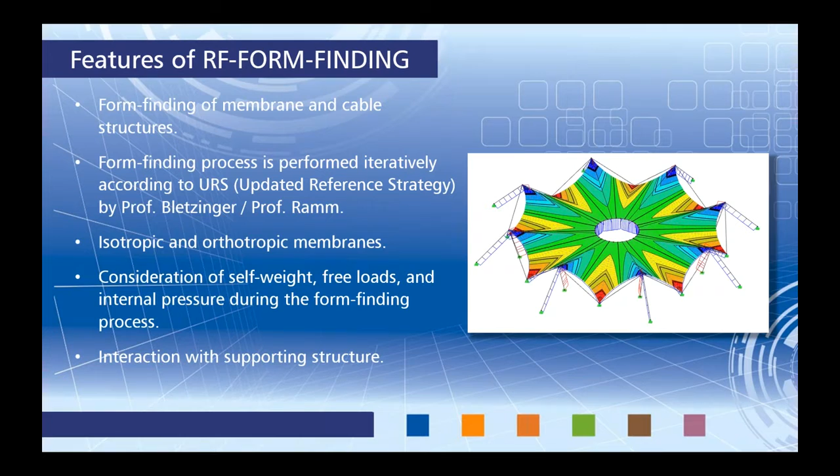Our other add-on module, RF Cutting Patterns, uses the minimum energy method for a very accurate cutting pattern. Essentially, we're turning this 3D membrane element into a 2D cutting pattern via the minimum energy method. We can also take into account uniform or linear compensation by warp or weft directions, meaning typically these membranes are going to be stretched when they're applied to our structure. So for the 2D cutting pattern, we can take that compensation into account, and we can apply these compensations for boundary lines around the 2D cutting pattern, so it doesn't necessarily need to be in the warp and weft directions.

We can also allow for different allowances, such as for welding and for boundary lines. Welding for overlapping members, maybe we need some additional material. Boundary lines for the upper and lower portions of the 2D cutting pattern as well. There is adaptable data organization, meaning even after we've performed the calculation for our 2D cutting pattern, we could go back and easily add in some additional material for welding and boundary lines without having to recalculate the 2D cutting pattern.

Lastly, I'll show you how to output the cutting patterns both graphically within the RFEM printout report, as well as tables. These tables can be exported directly to Microsoft Excel for further sorting. And lastly, we can export them as a DXF file, open them up in AutoCAD, and show you how to utilize the cutting patterns this way.

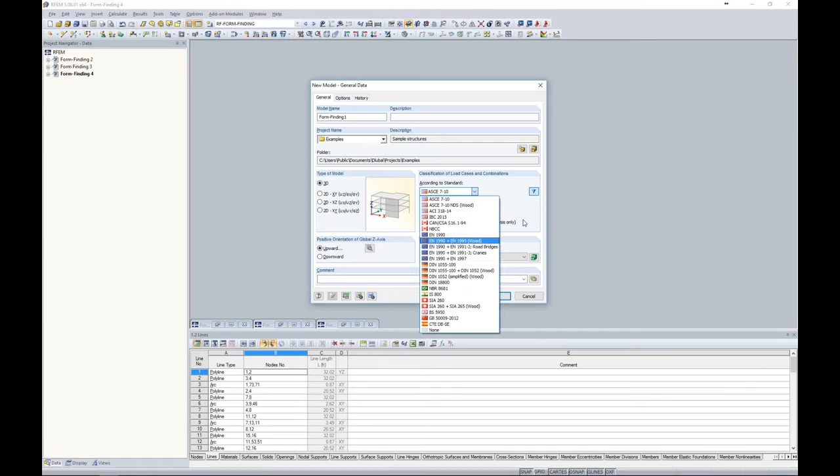When I have this checkbox checked, the program will automatically create those load combinations. You can see that when I uncheck this, I can manually put in those load combinations if I'd like to as well. It's important under the Options tab, when we're utilizing RF Form Finding and RF Cutting Patterns, to check on these checkboxes, otherwise we won't have those options within RFEM. So when checking out the form finding of our membrane structure, it's important to check these boxes, and then we can launch our model.

So up pops RFEM, and you can see here that we have our basic graphical display in the center. We have our tables to utilize down at the bottom. Over on the left is our project navigator, which controls some of the input data. We'll also see our results available here, and lastly we have all of our tools up at the top. Today we'll be using all of these options.

I want to begin with drawing a basic line element. So up in my toolbar, I can choose to draw a new line, and you'll notice that we have many different line types. You'll hear me say this often today, that we have a lot of AutoCAD-like capabilities within the program, so things like complex geometries, which is quite common for membrane type structures, is really no problem to model within RFEM.

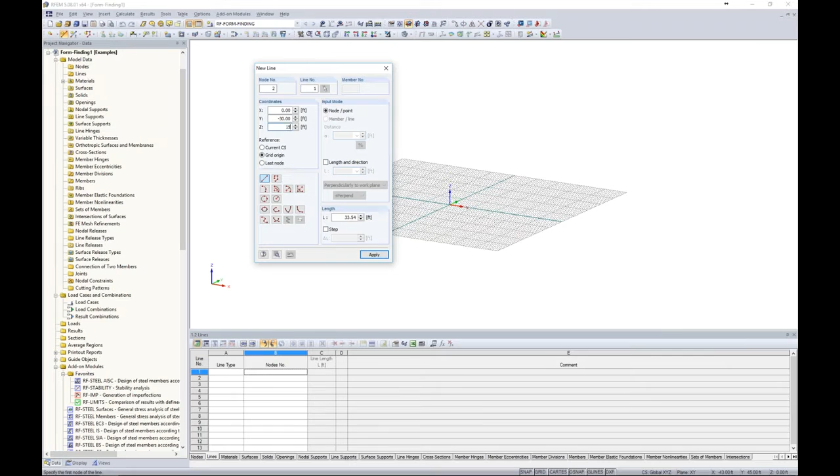To begin with, we are just going to do a typical straight line here, and I could draw this graphically in my viewport over on the right, but I can also just enter nodes directly. For example, 0, -5, 35, then click apply, and enter my second node at 0, -30, 15, and hit apply. So now you can see we have this line element in our 3D view. I'm going to select this entire line and the nodes and use my rotate copy tool.

Here I can specify that I would like 8 copies at 40 degrees, rotating everything about the origin 0, 0, 0. We also have a nice feature down at the bottom - if I click on expanded settings, I can create lines between my copy nodes, and even create surfaces between those lines. So now when I click OK through all of these dialog boxes, I have my conical structure with just a few clicks of a button.

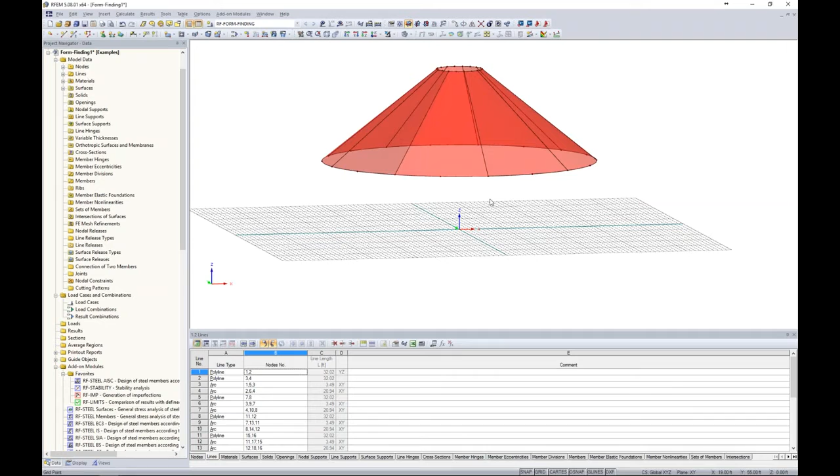Now turning this into a plan view, and maybe I turn off my grid down here at the bottom, I'd like to create cable elements spanning between my longitudinal lines here. Now a cable element certainly can't be constructed in the field as an arch type line like this, so we need to create straight lines here. Well, how do we quickly do this?

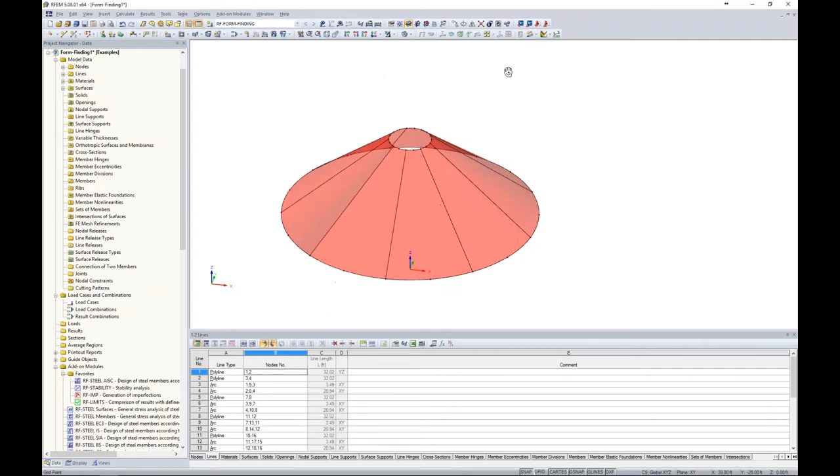I'm going to turn this into an elevation view, and highlight all of my members down at the bottom. You'll notice that my table 1.2 lines shows me exactly which lines I have selected in my graphical view. Using this feature within the table, I can show the selected objects only, so these are only my lines selected at the bottom of my structure. The line type right now is set at arc - I'm going to change this to polyline, then using the F8 key, I can quickly copy that same setting down for all of my line elements here.

Now, if I turn this back to my plan view, you'll notice these are now straight lines, but I still have this node in the middle that I'd like to get rid of. For this, I'll turn this into wireframe view, and now holding down my control key, all I need to do is graphically select all of my nodes here. Then I simply click the delete key, and I have these straight line elements.

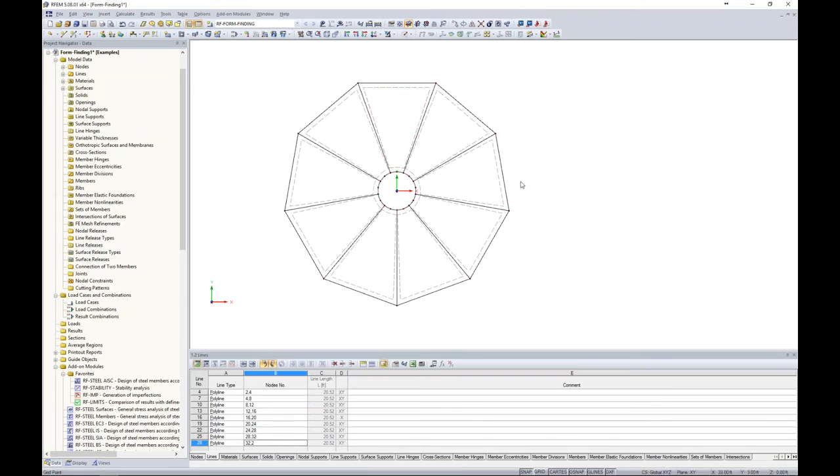So with these line elements, I'm again going to select them graphically down at the bottom, and right click to edit the line. Now every member within the program is created with a line element underneath it, so we have a nice tab here up at the top called member, and we can create a member availability. Now up pops our new member dialog box, and we can create a new cross section.

So here I launch my cross-section database, and you can see that we have many different cross-sections, such as our rolled sections, built up, thin-walled, massive for concrete sections, timber. For these elements, I'm going to utilize the solid sections here. We have our filters over on the left, which show some different producers applicable to the Eurocode design. We also have our AISC database.

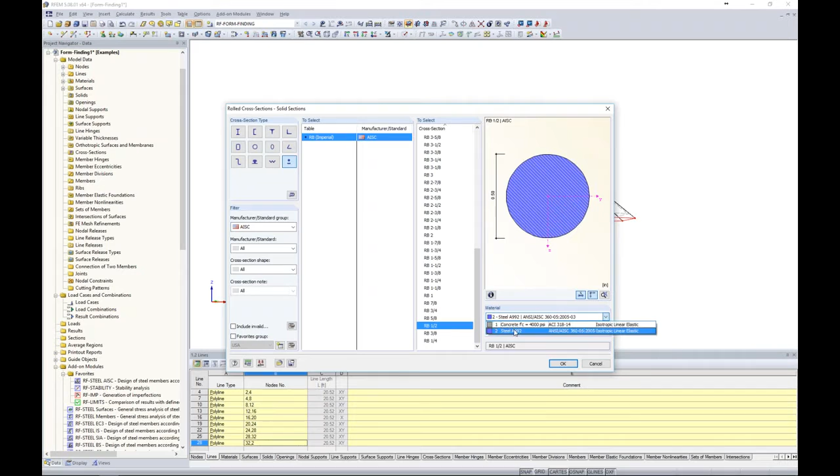Now I can scroll all the way down to the bottom to choose a 1/2-inch diameter cable element. My default materials within the program are 4,000 psi for concrete and A992 steel. I'd actually like to create a new material here.

My material database is brought up, and this looks similar to my cross-section database as well. I have my filters over here on the left, so under material category, I'm going to change this to stainless steel. Now I have the ASTM as well as Eurocode down here to select from. Looking at ASTM, I have a very long list of stainless steel materials. We can also utilize our favorites list, which I created called USA - these are common materials I use often for projects, and you'll notice I added stainless steel A479 here. I can select this material and click OK through all of these dialog boxes.

Now the member type right now is set at beam. I actually want to change this to a cable member - that's the element we're trying to model here. So now I can open up the member type. This is available because I've activated the RF form finding add-on module; otherwise you wouldn't see this option available.

Here we have the cable parameters for form finding, and with this we either have geometry or force. With geometry, we can set a target cable length, or a target cable absolute sag, relative sag. With force, we can set a force in the cable or a force density. These are the properties that we'd like to see after the form finding process is complete.

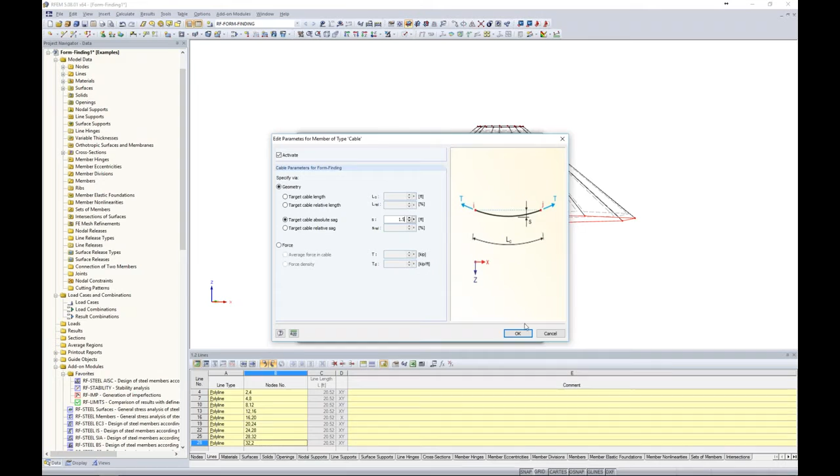When we're choosing geometry, this is maybe relevant for border cables and membrane structures, such as what we have today. The force option is maybe relevant for cable webs. For our example, we'll choose a target cable absolute sag of 1.5 feet, and I can click OK.

So now that I have set this form finding capability, I click OK, and now we have the cable element specified down here at the bottom. I want to turn this back into the rendered shape to show you guys that right now my surface elements are red - that means there's probably something missing within the program that is trying to flag me. If I highlight all of my surfaces, right click and go to edit, you'll notice that my stiffness is set to null - null means nothing. So we need to put in these material properties as well as our form finding process for our surface elements.

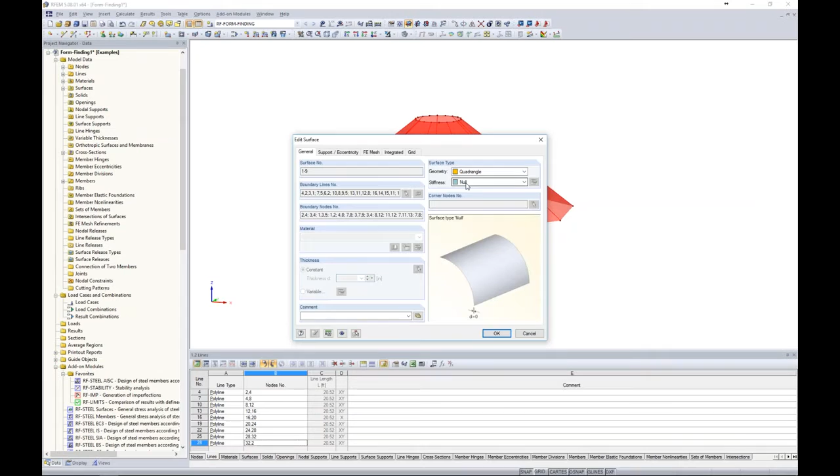So the first thing I'm going to do is use my drop down to select membrane orthotropic, and here is where I'm going to create a new material. Now, membrane materials are not so straightforward as something like steel A36 or A572, for example - this is something we maybe get from the manufacturer, or do our own testing on these material membranes. So when I go to create a new material, I need to first give it a description, and our material model by default is set to isotropic linear elastic.

I actually want to change this to orthotropic elastic 2D. Now up pops my dialog box for my stiffness properties. For this, I'm going to jump back to the PowerPoint to show you a quick screenshot of some calculations. For my membrane material, I got this from my colleague in Germany - this is the calculations after placing this material membrane into a biaxial testing machine. We apply different forces and get results based on stresses and strains with those different forces applied. We do our calculations in order to find out what these stiffness parameters are - that's a little history about where these particular membrane properties came from.

So back in RFEM, we can simply apply those stiffnesses here. For example, it was found that EX is 93 KSI, our EY is 84. Our shear modulus is going to be the same in all three directions at 0.15, and our Poisson's ratio is also important at 0.314. Now I click OK.

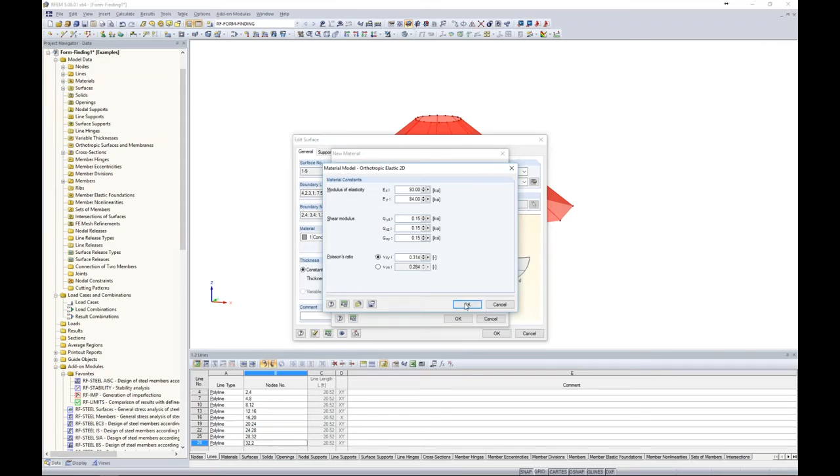So we have now defined the specific material that we'd like to use for these surface elements. Now, similar to the cables, we'd like to edit the parameters of the stiffness - again, these are options available especially in this form finding tab when we activate the form finding module. The type we'll use here is constant thickness, and under my next tab, constant thickness, I'm going to set the thickness at 0.04 inches. Then I can click on my stiffness matrix to see those values here.

Perhaps I'm interested in those. Under the form finding tab, this is the availability to define pre-stresses along the warp and weft directions with our form finding module. You'll notice we have two different calculation methods, both the standard and the projection, and this just comes from the general form finding method URS that I mentioned in the PowerPoint.

Standard is really used for membranes supported by points or arches or pneumatic structures. Pneumatic just means that they are air-supported structures supported by internal air pressure, which you can see down here is where we can define that internal pressure. Projection is used for conical shapes, so that's actually the type that we have today.

But just for example purposes, I want to show you what this form-finding deflected shape looks like by using the standard method to begin with, so you can see why we've chosen the wrong calculation method. So we want to define our forces, defined according to the warp and weft direction. This is the local X and Y axis.

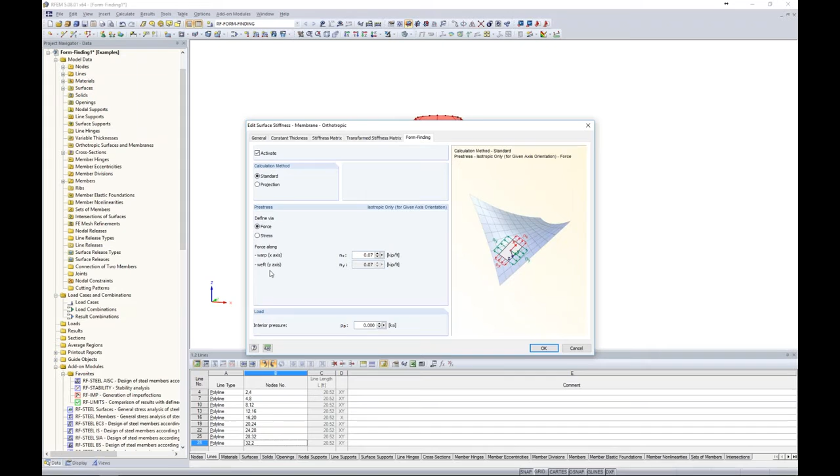Now, before I define these, it's very important that we go back to our model, and you'll notice my material is now blue because we specified these specific material properties, and I can right-click and turn on my local axes. If we're going to define these pre-stresses according to the local axes, you'll notice all of my local axes are going in different directions. This is not good if we're going to apply our pre-stresses globally to all of our surfaces. So how can we address this quickly without having to redraw all of our surfaces?

Well, if I highlight all my surfaces, I right-click to edit them again, we have a tab called Axes here. Axes allows us to quickly rotate our local axes, and for example this third option down here, we can point all of our local axes direct to a line. This line can be a fictitious line within the model. Here for example we'll choose the origin as the bottom point, which is going right up the center of the structure, and our second point will be at the origin but at a Z elevation of 35 feet.

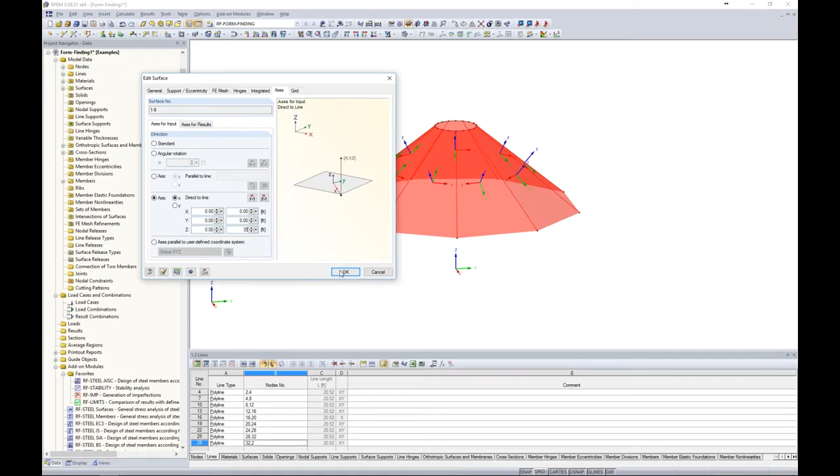So now when I click OK and I take a look at my local axes, all of those X local axes are pointing right towards the center of my structure. This is very important when we're defining our pre-stresses for our surfaces globally here.

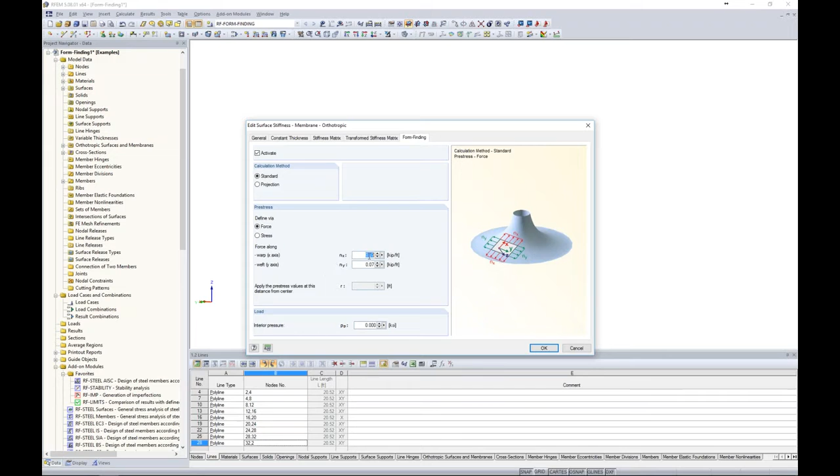So now going back to our General tab and our Stiffness Parameters, under the Form Finding, here is where we can specify our force in the warp or the x-axis, and weft is the y-axis. This is also known as the longitudinal transverse directions. So for NX, maybe we'll select 0.55 kips per foot, and we click OK.

So now that we've defined these pre-stresses, and I can turn back off my local axes, we'd like to run this form finding calculation. Before we can do so, we do need to support the structure somehow, otherwise we'll obviously get some type of instability. So just applying nodal supports at the bottom, I have my typical hinged support here. I can highlight over the bottom, I'll apply just a hinge line support at the top, nothing special here.

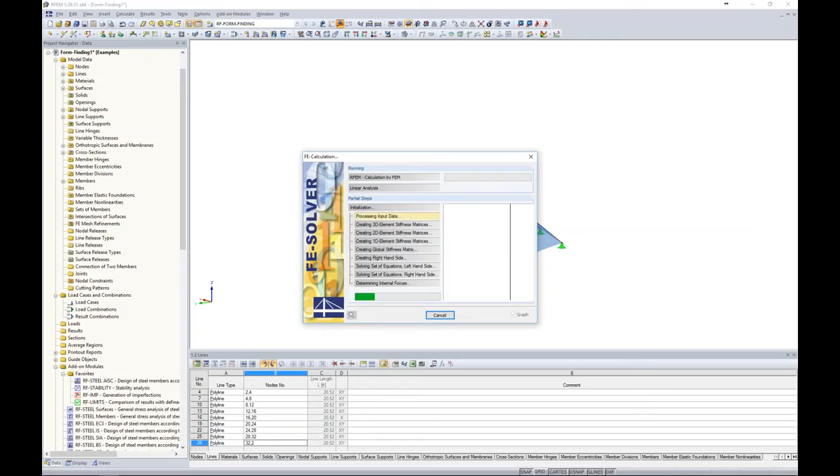So now with this RF form finding, we just click the show results. It's asking me to start the calculation. That's fine, we're applying the URS method. Now remember, we are running the standard procedure now. So in just a few seconds, we'll get our deflected shape based on those pre-stresses.

So as we can see for our conical structure, this is not the ideal shape that we would expect. So I think that should immediately flag us that, okay, we probably used the wrong calculation type.

So highlighting all of these surfaces again, we can right-click to edit it, go back into our form finding settings, and let's change this to projection. I need to redefine my NX and NY here, and it's also asking me where do I want to apply the prestress values from the distance from the center of the structure. We'll set this as 1 foot.

I click OK, it's asking me to clear my results. That's fine, now let's rerun the form finding process. So again, still applying those same pre-stresses, but we're using a different calculation type here to get our deflected shape.

And now we can see that this looks much better, what we would expect for our conical type structure. So what does this tell us?

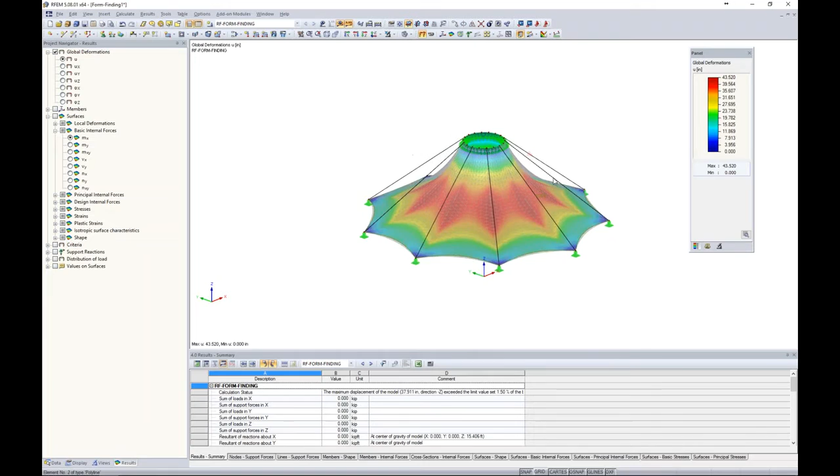Well, in our results, which is now available in our project navigator, we can obviously see the global deformations in inches in our contours, but maybe we're interested in the internal forces or stresses. So I take a look at my surfaces, in particular NX. Looking at my contours, I see at the bottom I have a stress of 0.566. Well, this matches our pre-stress that we put on the structure for the form finding process, or very close to it. That's exactly what we'd expect.

Looking at NY, exact same scenario. At the bottom we have 0.53. We applied a 0.55 pre-stress, so that's about what we would expect.

Okay, so now that we have done the form finding process, it's time to apply some loads to this structure. What we want to do is create a new load case, and I can do this utilizing my tool up at the top. I will give the first load case a description of dead load. Now, the action category is important because this tells us how we're going to apply these loads to the ASCE 7 load combinations, and in turn which load factors should be applicable.

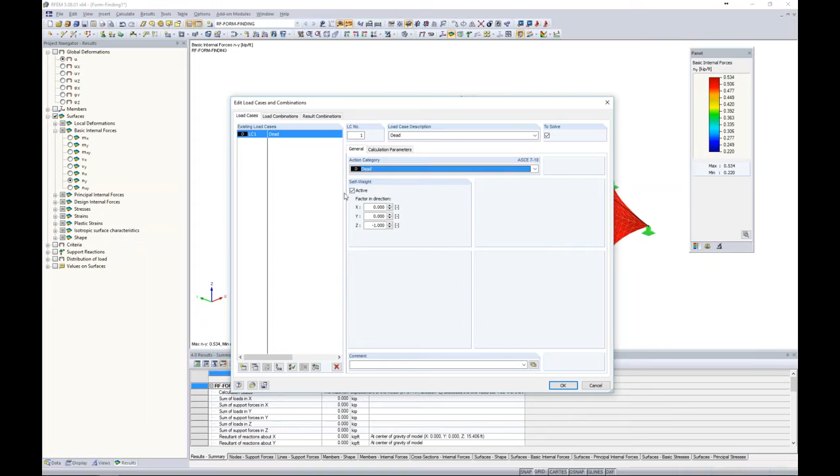So we will keep dead load for the action category. Self-weight is checked automatically for dead load, so this will account for our self-weight within this load case. For all other load cases, we'll leave this unchecked so we don't account for it twice. We click OK, and now you can see that no loads have been applied to our structure yet.

Using the new surface load, we can specify a load direction in the global Z, and I'd like to apply a magnitude here. Let's say this structure is just a basic canopy or something of the sort and really won't see too high of a load. So you'll notice I have KSF, kips per square foot, right now.

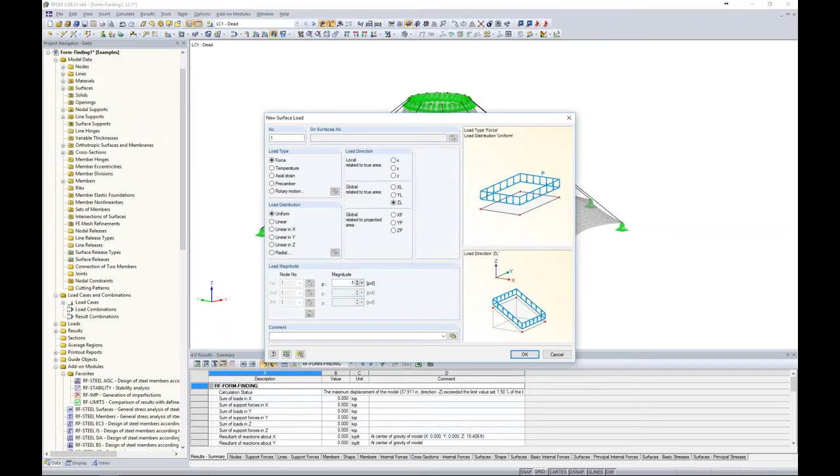Well, I can easily access my units and decimal places, and maybe I want to change my area loads to something more like PSF. I click OK, so now I can apply negative 1 pound per square foot, a very small dead load to the structure. I click OK, and then I can select all of my surfaces. So now you'll see that dead load was applied to each surface. The hole at the top was taken into account.

Everything was done automatically. Now, after dead load, we'd like to apply some wind loads. Now, wind loads for a conical type structure.

For this, I'm going to jump to the PowerPoint because I'd like to reference the European Design Guide for Tensile Surface Structures, from Appendix A 1.2. As you can see from these pictures, this is for a conical structure. We have our wind direction on the left coming straight towards our structure, and we have different zones as we rotate around the structure. Then when we relate these zones to the table shown at the bottom for a closed-sided structure, we have different wind pressure coefficients depending on where we're at on this structure.

In A, B, and C you'll notice are all suction type loads, and zone D is both suction and pressure. So it's a little bit complex in terms of how we want to apply these wind loads to our structure if we're going by this design guide's recommendations.

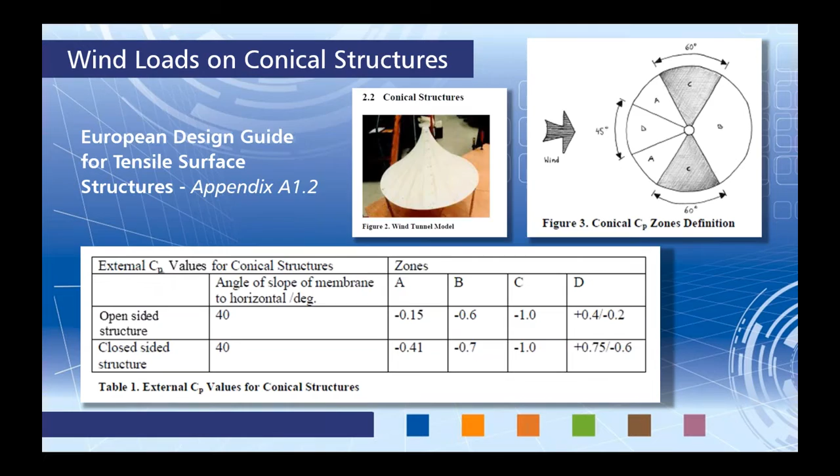I want to show you that it's actually not too complex utilizing some of the features in RFEM to take these different zones into account.

So I'm once again going to create a separate load case. The action category will be wind, and the description will be wind pressure at column. I say at column because a little bit later on I will draw in 3 separate columns around our structure at 120 degrees. This first wind load case will be for wind direction coming straight towards the column.

I click OK. So now that I'm in a new load case from my dropdown, I don't have any loads applicable right now. Putting this into elevation view, my first zone, zone D from our table, is this front structure here, but it's actually 45 degrees around this front column. So what I want to do is select this node down here at the bottom, and I'm going to use my rotate copy tool.

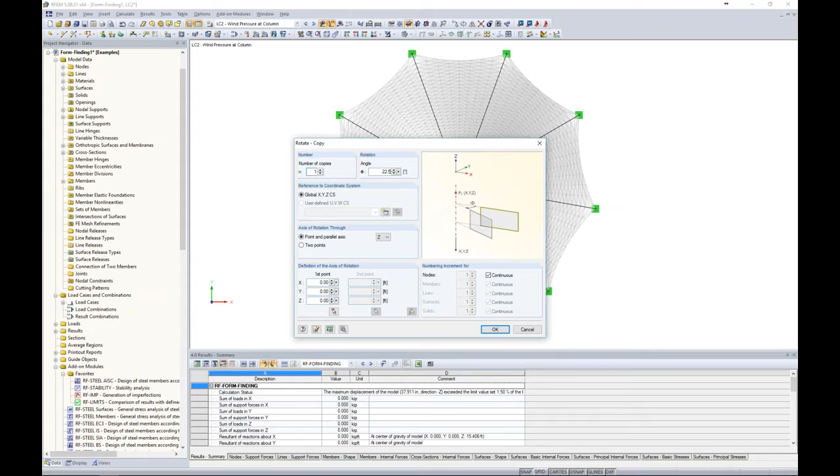This time I'm only going to make one copy at 22.5 degrees. I want to make sure under my details here to clear out the settings that I used before to create surfaces between my copied nodes. In the same sense, I'm going to do the same thing with my rotate copy tool in the negative 22.5 degree direction.

So for my wind loads, I previously used this new surface load. New surface load will apply the wind load to the entire surface, which is not what I want in this condition. We have a nice feature here called free loads. Free loads allow us to apply basically any different shape you can think of, whether that's circles, rectangles, polygons, all to our surfaces. It doesn't necessarily need to encompass the entire surface.

For today, we will use a new free polygon load. Now for this, we just specify our surfaces. We can either select them graphically, or I can type in 1 through 9, or I could leave this as all as well. We're going to apply it in the local Z direction, which is normal to the face of the surface according to the local axes rather than the global.

The magnitude here, I determined from that table, will be -9 pounds per square foot. Then I just select graphically my different nodes that I would like to apply this wind load to. I click OK, and now you can see that this wind load pressure is applied to the front of my structure, but not on the entire surface elements here.

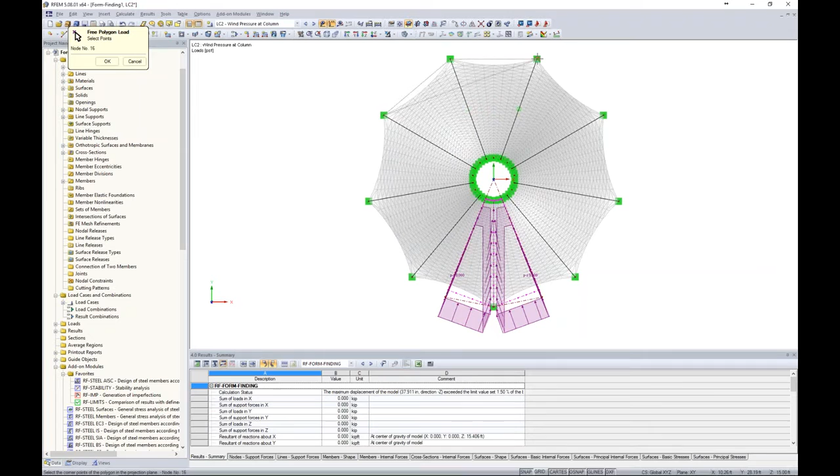Now, in the same sense, I'd like to do the same thing at the rear of the structure, but 120 degrees. So I'm going to again use this polygon load here in the local Z direction. I'm going to change my magnitude to 8 PSF, and then I click on my different points at the rear of the structure. I click OK, and now we can see that there is a surface load being applied to the rear of the structure.

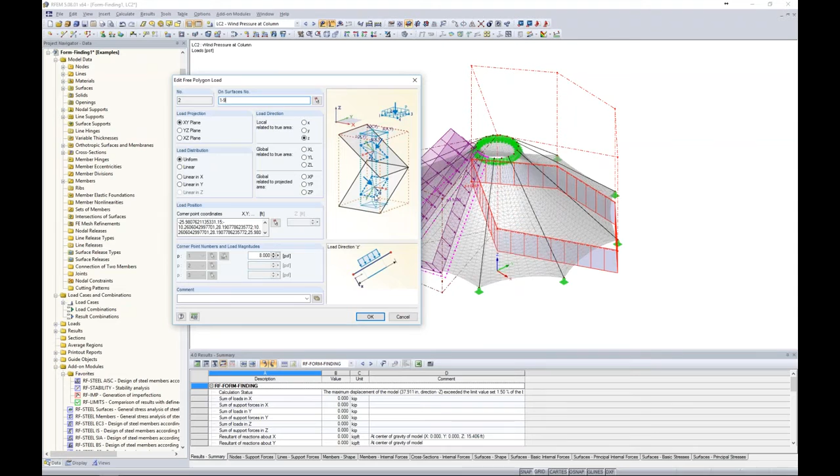And I just realized that I made a mistake. Looks like I applied this to surfaces all. It's the same thing - you can leave it as all or type in surfaces 1 through 9, but you can see the display is a little bit different. Just goes back to it being projected. We can project down through multi-level story buildings as well. But just for display purposes, I'm going to select this as all just so that it's very clear this is a suction pressure at the rear of our structure.

Now, in the same sense, I'd like to apply my other zone on the right side of the structure. So we again use a polygon load. We'll type in surfaces 1 through 9 in the local Z direction. My magnitude changes to 12 PSF. This is my highest load around the circumference of the conical structure. Then I select my points.

Now, something to note here, I would like to encompass half of this surface. The program has snap settings, again, just like what you would see in AutoCAD, so it recognizes that this is the midpoint of that surface. Instead of creating a new node like I did previously, I can just use this snap point. I click OK, and now you can see we have that suction on the right side.

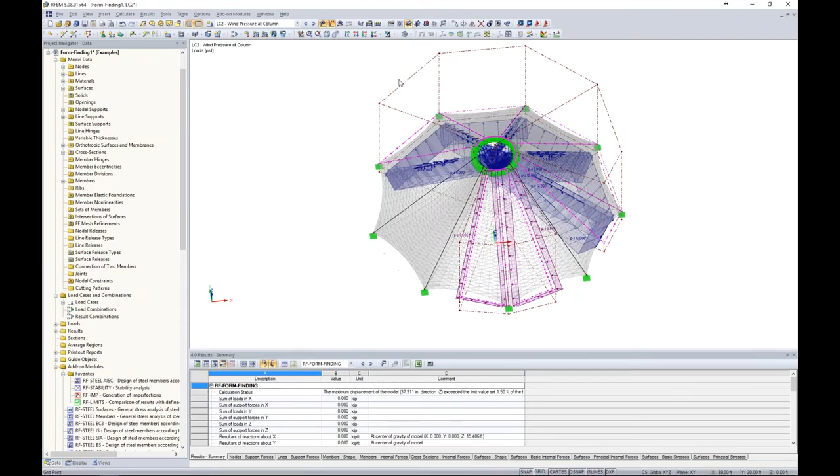Now, lastly, we have a small zone here to do the exact same process. Surfaces 1 through 9. My magnitude is changing to 5 PSF, and I click on my remaining nodes on the right side of my structure.

Okay, so now that we have these suction loads on the right side, we could do the same process for the left side, but I really want to show you those tools that make modeling a little bit more efficient. We have a symmetrical structure here, so what we can do is just hold down our control key to highlight these two loads over here on the right and use our mirror tool. Mirror is something that you would find in AutoCAD. It's also available in RFEM where we can create a copy.

We can mirror about the global axes and the origin. And I click OK. So now you can see that those loads are now generated on the other side of the structure. So essentially you can see how a very complex load can be quickly drawn within the program, especially for these conical type structures and membranes that would normally be very complex.

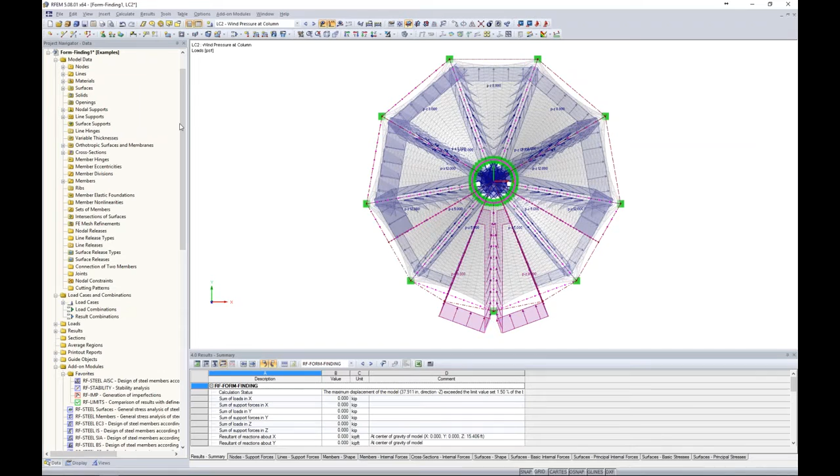As mentioned in the PowerPoint, we want to take into account both pressure and suction from this front-facing wind direction. I go back to my load cases and combinations and create a copy. Instead of wind pressure, we'll call this one wind suction. I click OK. My loads look exactly the same, but I double-click my load at the front and change it to a magnitude of 7 PSF to account for that suction at the front of the structure instead, just a different load case. Now we have our wind loads for both pressure and suction.

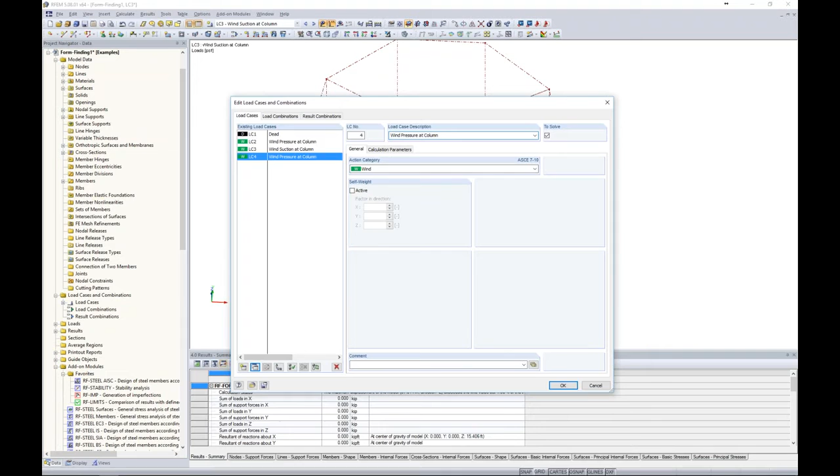Perhaps I'd like to take into consideration if the wind load shifts at any point along the structure. I go back to my load cases, choose my wind pressure at column, and create another copy. This time, instead of at the column, I'll call this one between column. I click OK, and I'd like to shift all of these loads 60 degrees over from where they're being applied now.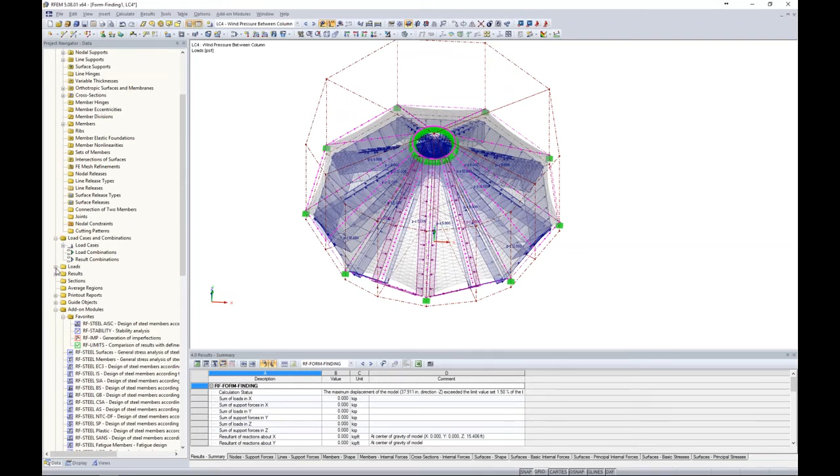For this, I'll utilize my project navigator on the left, which has all my input data just like my graphical view and tables do. If I scroll down to my loads tree, I'll see my 4 different load cases. In LC4, I expand my free polygonal loads, use my shift key to select all my surfaces, which are highlighted graphically, and use my rotate tool. I'm not going to create any copies, and I'll rotate it 60 degrees, making sure everything is clear in my detail settings. I click OK, and now you can see everything was shifted over 60 degrees. Everything was taken into account automatically for our surface load application, and that's all we need to do.

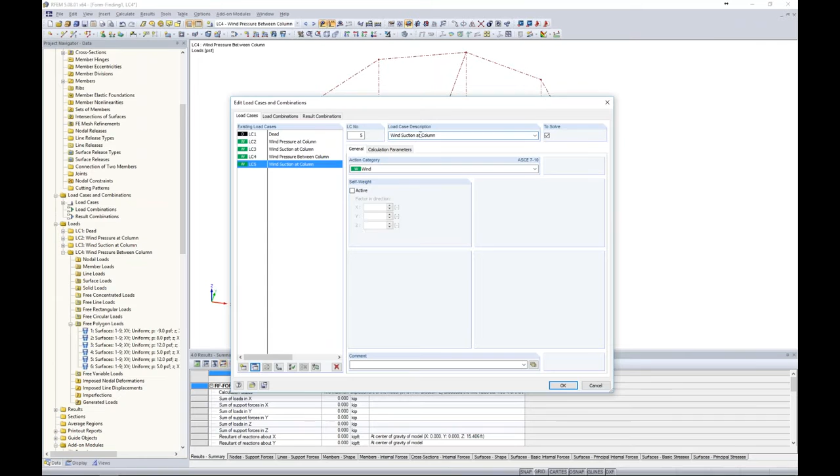Going back to the load cases, I do the exact same thing, but for wind suction at column: I create a copy, rename it to between column, and click OK. Then under my tree settings for loads, I make sure I'm under LC5. I select all of my free polygonal loads and again use my rotate copy tool to make a rotation of 60 degrees. I click OK, and just like that, all 4 of my load cases are complete for my wind loads.

Now, lastly, I'm going to create one more load case, and we'll call this one snow load. The action category will be set at snow. I click OK. Because I didn't create a copy of any of my previous load cases, I should have no loads in this particular snow load case right now.

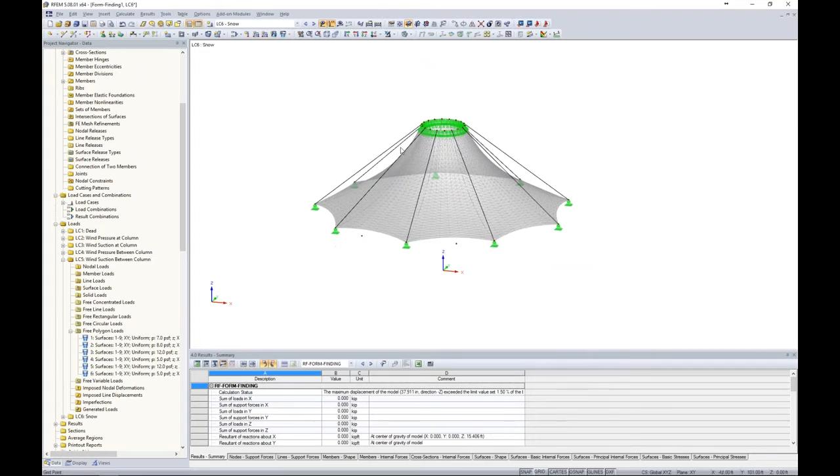For this, I go back to our new surface load and apply it in the projected Z direction with a magnitude of -8 pounds per square foot. I click OK, select all of my surfaces graphically, and here's my projected snow load, again with that opening taken into account and all of my surfaces. That's really all we have to do in terms of our application for our loading.

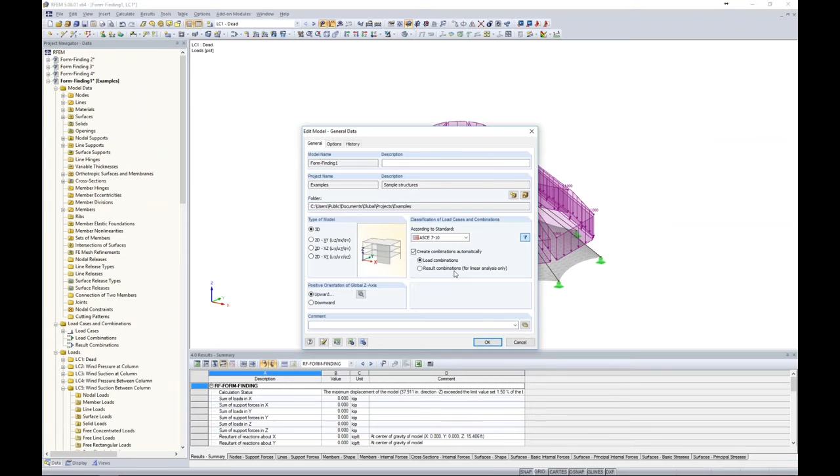Taking a look at our load combinations now, it looks like I forgot after the fact, which is no problem. Going back to my form finding, I can right-click under my general data. I left this as unchecked, but I want to check it because I want my load combinations to be created automatically. So you can see you can always go in afterwards to select or unselect that.

Now going into my load combinations, I take a look at my actions and see that I have dead load, wind load, and snow load. Dead load and snow load are pretty self-explanatory, but wind load has 4 different load cases here. So how is the program going to apply these to the ASCE 7 load combinations? Right now it's set to alternatively, meaning it will be LC2 or 3 or 4 or 5. We can also choose simultaneously, so that all 4 load cases act at the same time, or differently, meaning the program will come up with every different combination of these 4 load cases, such as LC2 plus 3, 2 plus 3 plus 4, 2 plus 5, and so on.

So you do have control over those different action categories. Now, combination expressions - automatically the program will create our LRFD load combinations as well as our ASD load combinations.

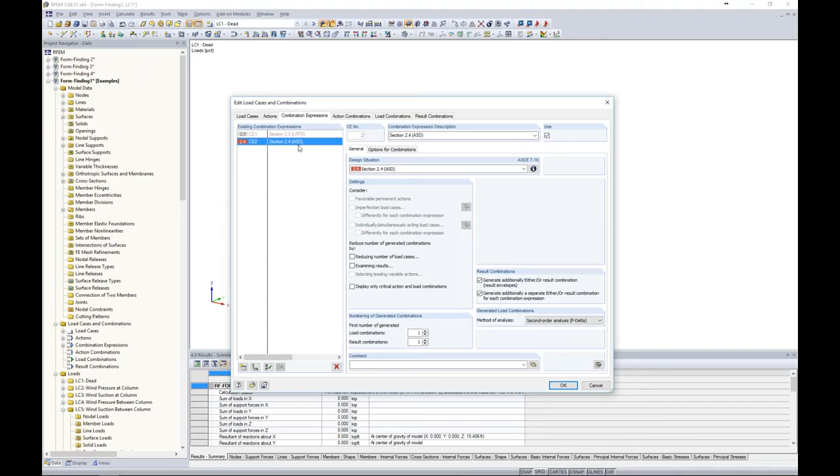Let's say for membrane design, I'm not interested in applying my LRFD load factors. So what I can do is just uncheck this for now. I'd rather just generate the ASD load combinations, and I can click on my info button here to see that my load factors are more around 1.0 that I'd like to use for my membrane design. So then under the load combinations, you can see the program automatically generates our ASD load combinations based on the existing load cases in the program. And lastly, we have our result combination, which is nothing more than an envelope solution for all of our ASD load combinations. Now I can click OK.

So let's run one single load combination here just to view how our results will look. What we're going to do is utilize the RF form finding deflected shape, which we've already done, and just apply dead load to it. You can see that solves rather quickly. Taking a look at our results now, it looks the same as what we saw with RF form finding, but now we should obviously see some higher internal forces and such.

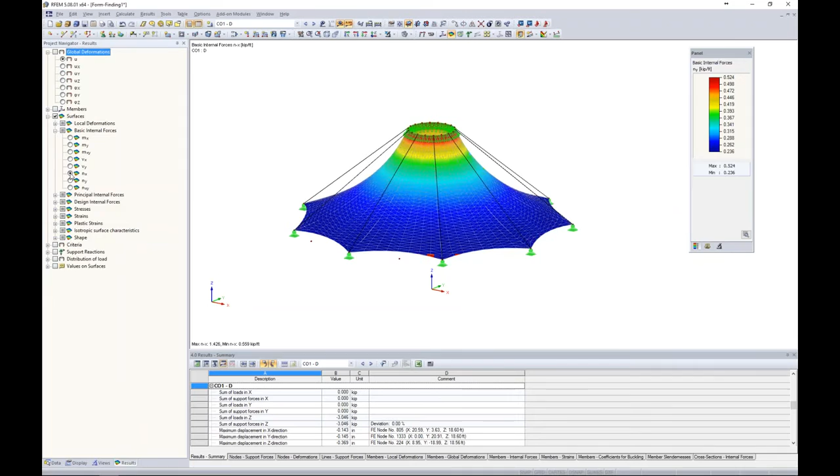For our membrane here, we can view our NY forces, our NX forces, for example, in kips per foot as contours. Remember, we have our cable elements down at the bottom, so I can view my members and in particular my internal axial forces for those columns at the bottom of my structure here. So that's what's available in terms of solving for the analysis only within RFEM.

Now for membrane design, you could take these internal forces - maybe you have an Excel spreadsheet that you use, or you do some hand calcs to do design of the membrane. I want to show you our other add-on module in the program that we can also utilize to do some design checks for our membrane elements.

For this, we will launch RF Limits. RF Limits is pretty straightforward. This is an add-on module, and when I say add-on module, it's nothing more than just a dialog box that pops up within the program. We don't need to remodel anything. All that we're doing here is specifying some limit parameters so that the program can give us a design check based on internal forces compared to design capacities.

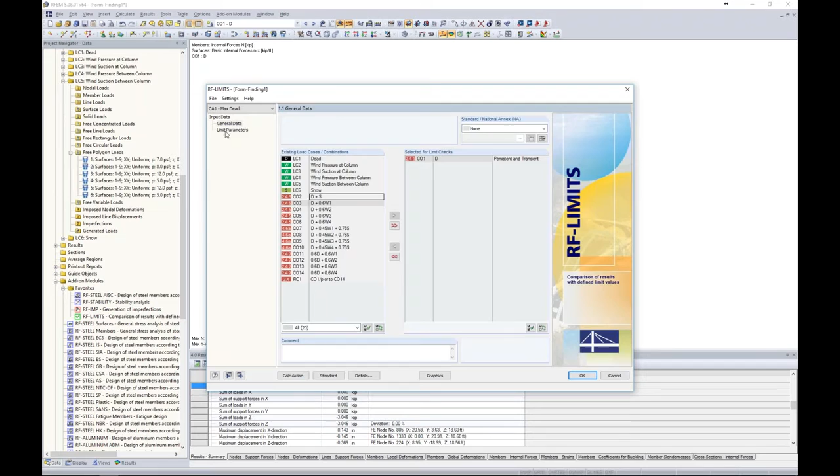So for this first case, let's rename this case - we will call it max dead. I click OK. So perhaps for this particular membrane, after our testing, we found out what the max NX and NY internal forces should be, meaning that the material should not exceed these internal forces, otherwise it's going to fail. So we have some specifications for dead load only now, so we're only going to check dead load, and I move on to limit parameters. My limit description - I can just call this one membrane.

Now the object type, I'll select surface here. Now I can either select these graphically, my surfaces back in RFEM, or I can just type in 1 through 9 there because I know I have 9 surfaces. And then here is where I can select my limiting internal forces. For example, I have my NX force here. When I check this checkbox, the program allows me to input some ranges. Let's say we've determined that the max value for dead load should be nothing more than 0.43 kips per foot, and I want my range to be somewhere in between this range.

Now, this is tension only. So if I were to experience any compression forces, well, obviously that membrane is doing nothing within our structure, so we'd certainly want it to flag us. So I'd expect something between 0.43 within the tension range. Same thing for NY - we give it a different capacity of 0.37 kips per foot, and the range of the internal forces must be someplace in between there.

So now we're ready to run our calculation. All it's doing is taking the internal forces, bringing it to this add-on module, and comparing to my maximum values that I just input in. So we can immediately see this big red X here. I take a look, it looks like my existing value is 1.396 kips per foot. This is well over the 0.43 that I originally put in. So what can we do to maybe change this?

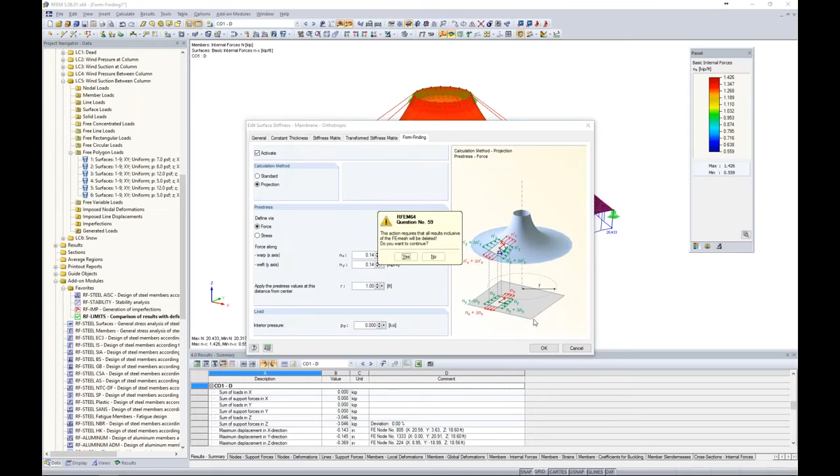And we click OK. So now you'll notice it's asking me to clear my results. That's fine. We've lost our form finding shape.

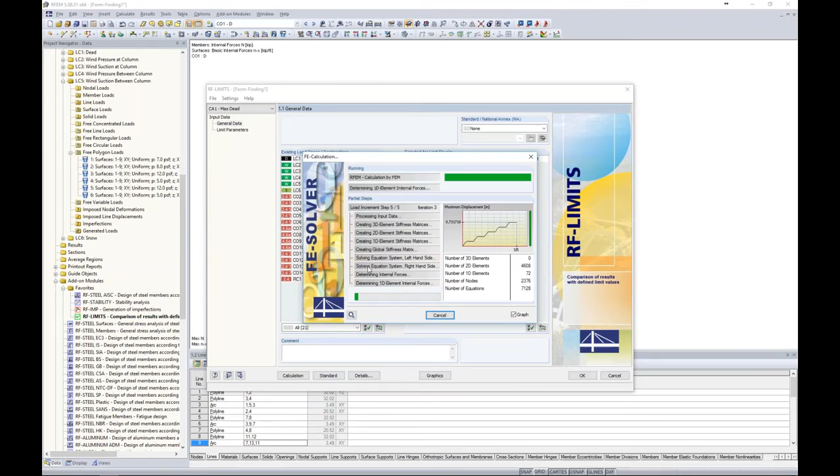That's no problem, we can rerun that either here within RFEM. If I just go back into RF Limits and click calculate, the program knows it needs to recalculate the form finding, then apply the dead load combination to come up with those new internal forces, bringing those into this add-on module to compare to my limiting values.

Now you can see that we're around 0.409, that's within my range, so I get a design ratio of 0.95.

So that looks good. Now I can also view the limit checks by surface. So we have our table here of all of our different surfaces. What's nice is that as I'm scrolling down through this table, it is synced up to our graphical view within RFEM, so I can know exactly which surface I'm looking at.

So that's good for dead load, but obviously we have a lot more load combinations we need to take a look at. So let's create a copy of our case here, and this time we'll call it max total.

So now for my max total, under my general data I have my controlling internal forces, my capacities for everything, that should include dead load, snow load, and wind load. I've already checked my dead loads, maybe I'm not concerned with that, but I'll move the rest of my load combinations over here to check for my calculations.

Now my limit parameters, again, since I made a copy it remembers all my information from that last case, but I probably want to change my maximum values here since we're applying a lot more load. For example, NX max might be something like 1.26 from our testing, and Y max might be something like 0.95 kips per foot, and now I'm ready to rerun that calculation.

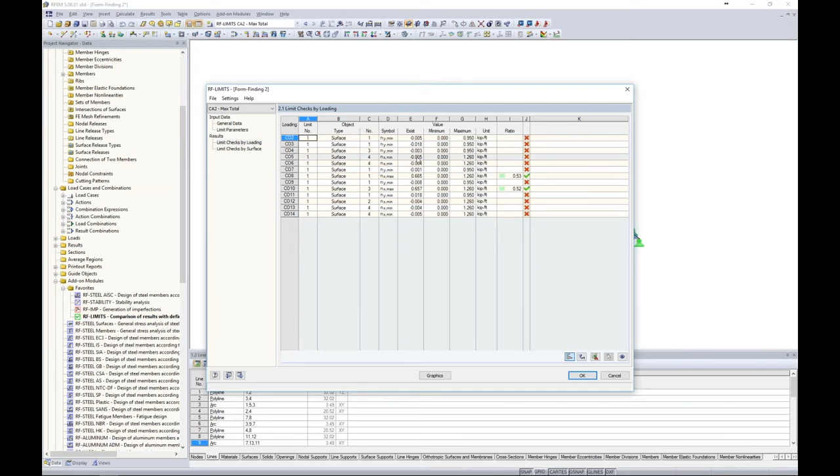Well, again, I'm seeing a lot of red here, which probably tells me there's some type of problem going on. But I look at my ratio, and I don't even have a ratio shown. Well, why is that? Looking at the existing forces, I have compression forces, and they're very, very small. So what exactly is going on here? Realistically, from the applied pre-stresses and my form finding, everything should be in tension, at least what I think.

So there's something I'd like to point out that we need to take into consideration. Back under the General Data tab, we have this detail setting here, and you'll notice the default is continuous within surfaces.

So what the program does with internal forces, but also with deflections, with stresses, with anything we can view graphically, it uses a smoothing algorithm to tie all of these values together so we can make sense of it when viewing it in RFEM. Otherwise it would just be kind of random numbers, not really tied together with these nice contours we could view. That's great for viewing purposes, but sometimes it's not okay when we're doing design, such as this case.

The other option here is constant on elements. So it will not use a smoothing algorithm to tie all our internal forces for a single surface together, but rather it's going to take internal forces from each FE element into the program.

Now, there really isn't a right or wrong way to do this, it's just purely how you're viewing your results differently within the program. So by choosing constant on elements, we're foregoing that smoothing algorithm that makes everything look nice and pretty, but rather just bringing in the actual internal forces on each FE element.

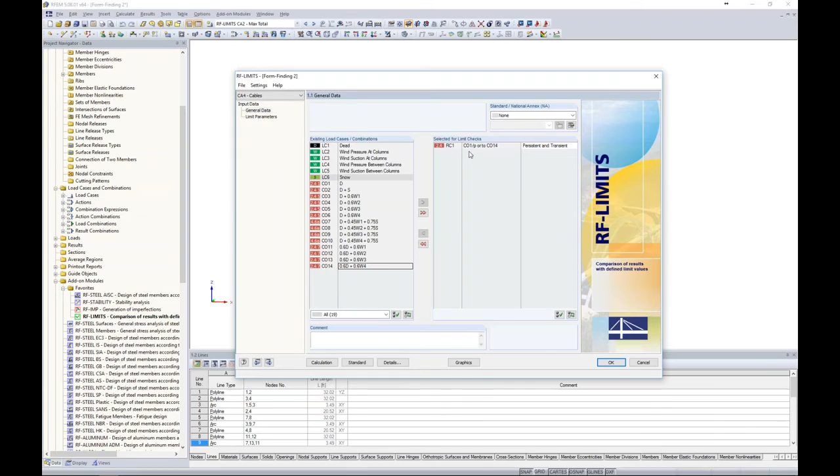Looking at limit parameters, this time we'll call this one cables. The object type here is member. Remember that we have 9 different member elements within the program. Those are our cables down at the bottom. And here we'd like to check our normal forces within those cables.

So say we got these values from the manufacturer that produces these cables, and they tell us that you cannot have anything greater than 13.71 kips as an axial tension force within this cable. I'd like my range to be in between. Again, something should be in tension, I don't want to see anything in compression. And then I can run my calculation.

So keep in mind that these are being designed per ASD, so probably later on we'll come back and check these against our LRFD load combinations, which are more typical for design rather than ASD. But just to double check, for now, if we weren't passing ASD, we certainly won't be passing LRFD, and it looks like we have a ratio of 0.77. So everything looks good so far in terms of our code checks or our design checks for the ASD load combinations.

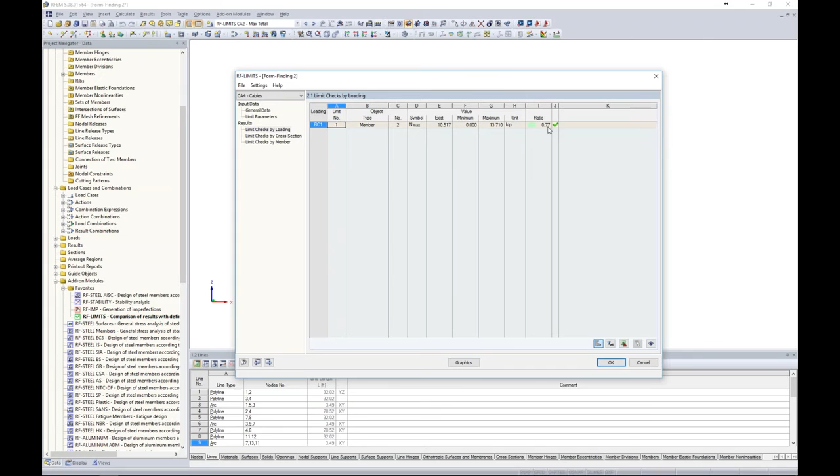Okay, so now that we've completed the membrane design, let's consider the supporting structure. I mean, the membrane design is great, the cable design is great, but it really, maybe we'd like to incorporate it with the rest of the structure here, all within one model.

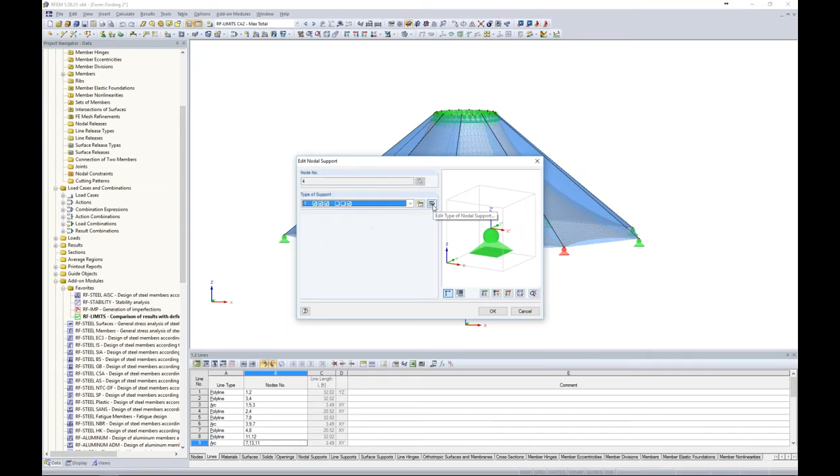So what I'm going to do is I'm going to get rid of these supports, but before I do so, I want to double click and show you an interesting feature that we have. We can edit this support type or create a new support type, and of course we have our translation and rotation for our restraints. We can also put in some partial fixity here with spring constants, and then we have our nonlinearities.

And in my drop down from my nonlinearity, you can see that I have this option called form finding stage only. So what this allows us to do is to apply these support conditions only to the form finding process. Then when we move on to, let's say, our ASCE 7 load combinations, those constraints are no longer taken into account, they don't exist at all. So this is almost like a construction type phase that we can automatically account for within the program, a nice powerful feature to do so rather than manually having to do this.

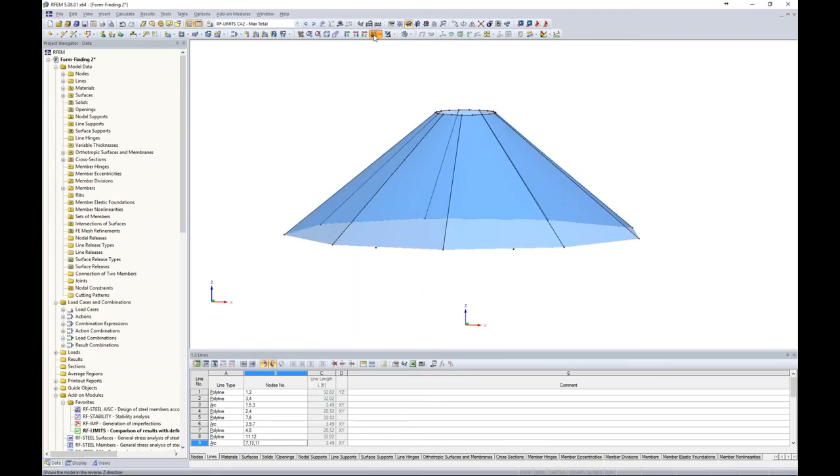For our case today, I'm going to use my project navigator though and open up my Nodal Supports. I can right click just to completely delete them. I'm going to do the same thing with my line supports, right click, delete. And now putting this into plan view, I'd like to create a ring type member at the bottom of my structure here.

I can easily do this by highlighting my node down at the bottom and going to my rotate copy tool. I'm going to create 3 copies at 120 degrees, and in my detail settings, select the option to create a line between the nodes, but also create a member between them.

Now the member type is beam, a typical beam or column element within the program. We're not working with cables anymore. So I open up my library for cross sections, and here I can select my circular hollow sections. Using the filters on the left, we have AISC, our Canadian sections, as well as many other international standards.

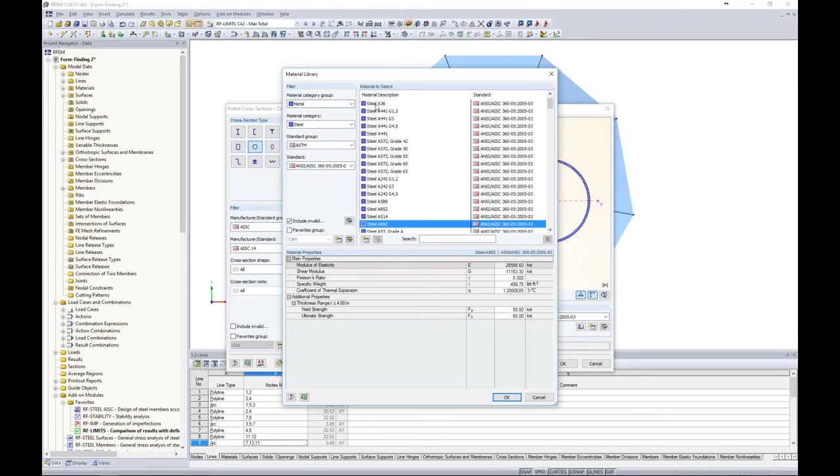For today, we will use an HSS 10.75 by 0.25. The material is steel A36, so I want to create that new material. Using my filters, I see steel A36 up at the top for my ASTM. I click OK through all the dialog boxes, and my beam is automatically generated around the bottom of the structure. That was fairly easy.

Now in the same sense, I'd like to create the 3 columns I mentioned before - one up at the front and a couple in the back, all 120 degrees apart. I held down my control key to select these 3 nodes, and I'm going to utilize my move copy tool. We will create 1 copy in the negative 15 foot global Z direction.

I'm utilizing this feature just to show you some different options within the program. You could easily draw in these columns with a couple clicks too by drawing a new member. So this is just one other way to do it.

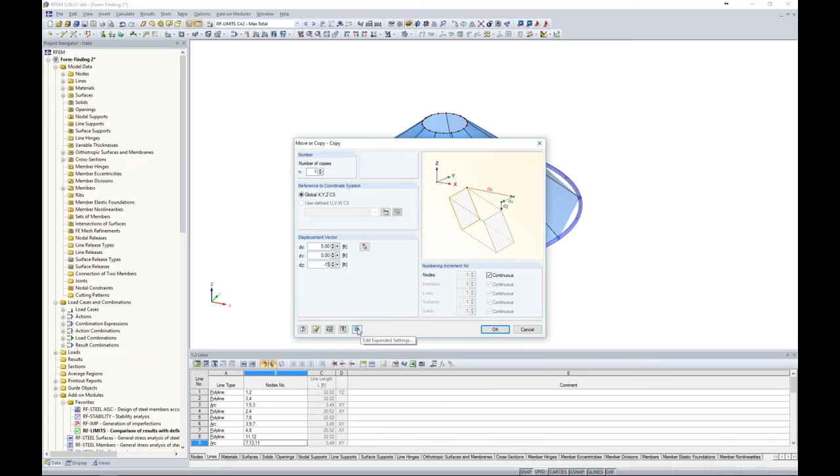Under the details settings, we'll utilize copied lines and members between the nodes and create a new cross section here. I want to use an HSS section, but a slightly smaller one - we'll choose 8.625 by 0.25. Steel A36 I've already defined within the model, so now I'll always have this option every time I go to draw a new member.

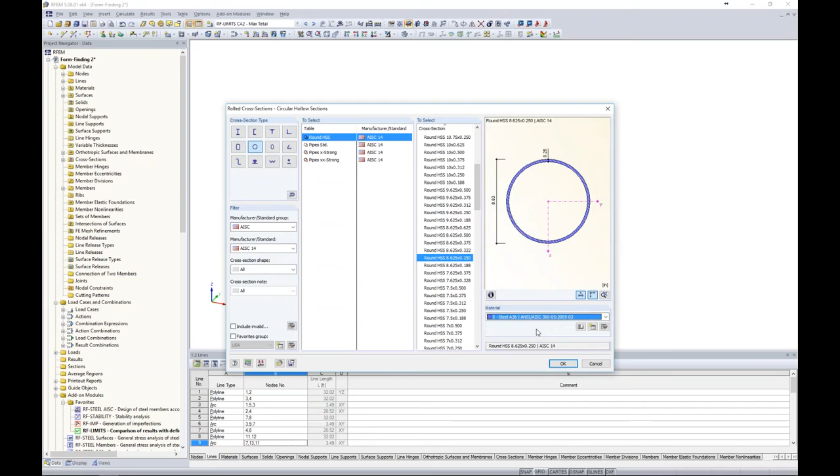I select steel A36, click OK. I'd like to have a member hinge up at the top, so the moment is released at the top of my columns. For this, I can easily create a new member hinge here.

I get a nice little picture showing exactly what my local axes are. The program suggests you probably want to release your Y and Z axes, and that's correct - I'd like to release those for my moment. You also notice, just like our nodal and line supports, we have spring constants here for partial fixity, and we can get into nonlinearities such as partial activities, slotted joints, and so on. For us, we're just applying a simple moment release. I click OK through all my dialog boxes, and my 3 columns are created.

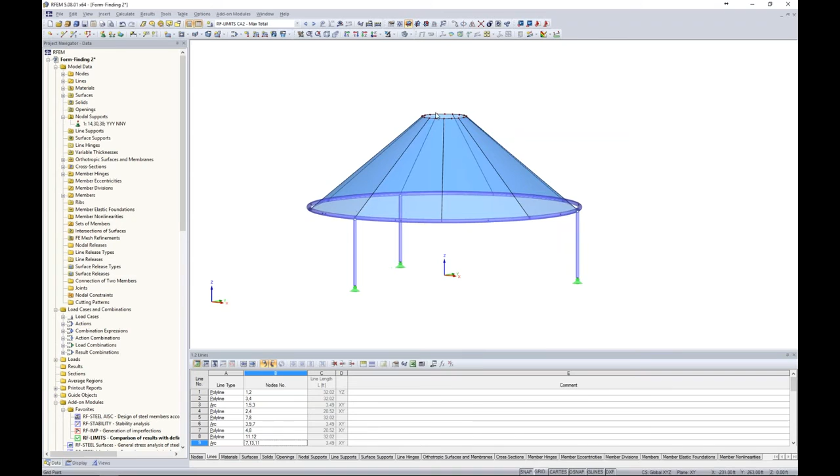Then I can apply nodal supports in a similar fashion to what we did before, just to the bottom of the structure. Now, I want to continue modeling because obviously the center of our structure isn't supported, but for this I'm going to jump to a saved model just for time purposes.

You'll see that I've created this column up the center of the structure, and added some braces to my outer columns. If I zoom in to the circular opening, I applied an MC shape, 8 by 20, to that exterior circle, and lastly, some flat bars to tie it to that center column - these are just 1 inch by 8 inch bars. You can model the rest of your structure with any type of materials, whether aluminum or steel, to account for the supporting structure.

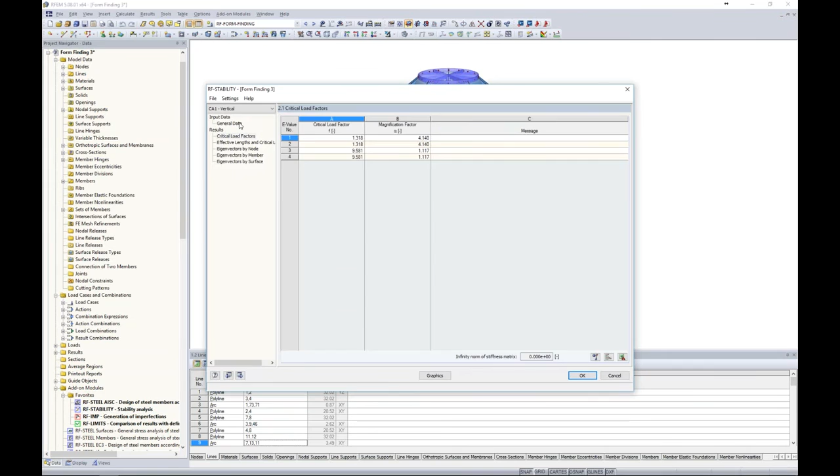So how do we utilize some of our other add-on modules to do a complete design of our membrane structure? Remember we've already done the membrane design, which you can do with the structure I'm showing you here. But let's take a look at another add-on module, RF Stability. It's pretty powerful in that we can do a stability analysis to show different buckling shapes from an applied load. For example, I created this first case here called vertical.

I applied my load case dead load. Then when I run my calculation, I get my critical load factors for my structure. This is based on the buckling behavior of my entire structure with 4 different buckling modes.

I can view this graphically, which I think might be a little bit more interesting. Based on the applied dead loads, for example, I have my eigenvectors here, only to a max of 1.0 in their unitless because it is an eigenvalue analysis. I can view my different mode shapes. I only solved for 4 mode shapes here, but I can view the different buckling shapes.

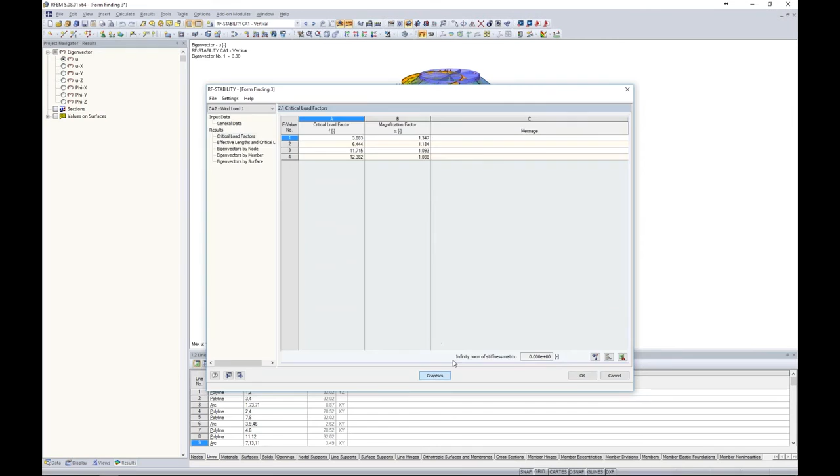Now, in the same sense, going back to RF stability, I have created a second case here called wind load, and I imported in my load case number 2, my wind pressure column. I run my calculation, I get my critical load factors for now my first wind load case. Again, I can view all of this graphically to view the different buckling modes. So it's quite interesting to show you what the behavior of the structure is under those applied dead loads and wind loads. So why do we do this?

Well, back under data, we have another add-on module called RF-IMP. RF-IMP allows us to apply imperfections to the structure. Now, imperfections can be related to the AISC, Chapter C, the direct analysis method, where the code tells us that if we want to apply things like notional loads, for example, to account for column out of plumbness or member out of straightness, we can apply imperfections and manually model these type of imperfections.

It's certainly important in Eurocode, as the Eurocode calls for imperfections within all of our load combinations. AISC is not so straightforward with that. It kind of really depends on some different factors, but regardless, it can be applied for all design no matter which standard you're looking at.

So when we're looking at RF-IMP, we can actually import the buckling mode from RF stability. That was what we were just looking at in our other add-on module. You can see all of my different cases here. For example, my first case, vertical. Now I can export those imperfections that are being generated by RF-IMP as a load case. So load case number 7, and I've named it vertical.

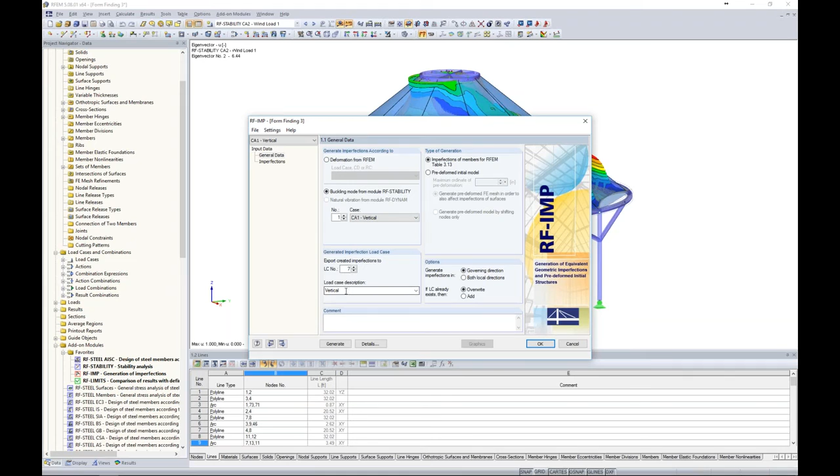So once I click generate, what exactly does this look like? Well, taking a look at my drop down here, I can take a look at the vertical here, and it looks like it's not showing up quite yet. Let's see. Well, regardless, we can view them graphically, but let me make sure that they are being exported here under our load cases.

So like I said, these imperfections are being exported here as load cases such as vertical, wind load 2, 3, and 4. I click OK. Let's take a look and see if any of these other ones are showing up. Yeah, there we go. Okay, so here they all are, and basically this is what it's accounting for, column out of plumbness. We can zoom in here and see this is set at L over 400. So these are just dependent on our normal forces within that column, and then we can account for that column out of plumbness, or we can account for member out of straightness with these imperfections.

So as I mentioned, they're exported in as these load cases, and then under combination expressions, you'll see here that I activated my LRFD load combinations for design purposes. I unchecked my ASD because now I want to move on to my member design. But keep in mind, you can utilize both LRFD and ASD within one model. I'm just trying to simplify for today's purposes.

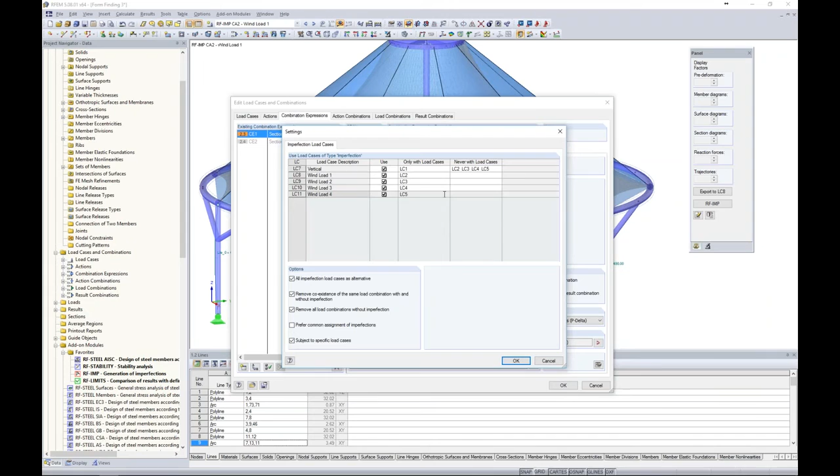So under our LRFD load combinations, we can activate these imperfection load cases. Then under here is where we can say, okay, we'll apply this imperfection with this load case and this imperfection with other load cases. So just some parameters here on how to apply those imperfections. Then under load combinations, you can see all of the different imperfections applied with their associated load cases such as wind load. For example, LC9 is the imperfection from wind load 2 applied only to wind suction at column. LC10 is wind load 3 applied only at wind pressure between column. So that's just kind of how we can apply those imperfections to the rest of the structure.

Now, lastly, we can run an analysis, a code check here from our analysis according to the AISC module, for example.

Same goes with Eurocode or the CSA steel module. I created two cases here called beams. I checked all my beams and braces against my LRFD load combinations. Keep in mind this module looks very similar to our RF Limits module, so once you learn one, the rest are pretty intuitive to use, which is nice.

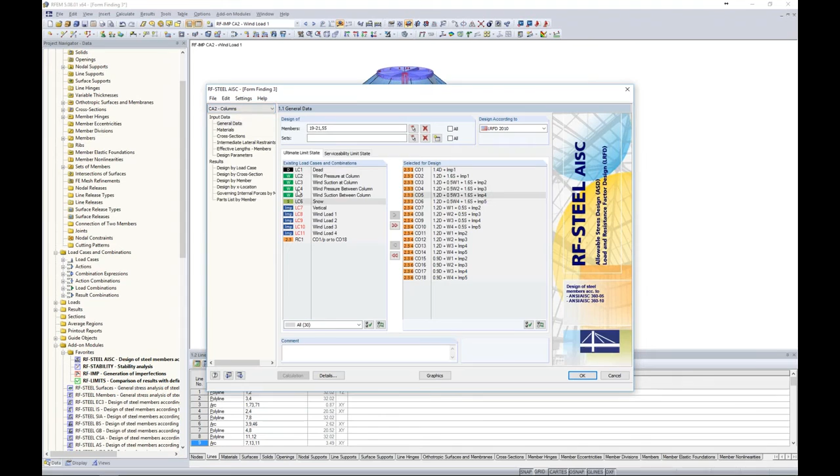I also ran a second case to take a look at columns. We run our calculation based on these LRFD load combinations and get our code check directly from the AISC. Our columns are well below 1, judging by our big green smiley face, and our beams and braces are at 0.73. We can view everything graphically as well to see that everything is below 1.0.

This is just to show you that you can utilize all of these other add-on modules for a complete structure design. If we want to go back and take a look at our form finding, we can do so here with our membrane. So everything is tied together. That really completes the overall structure design.

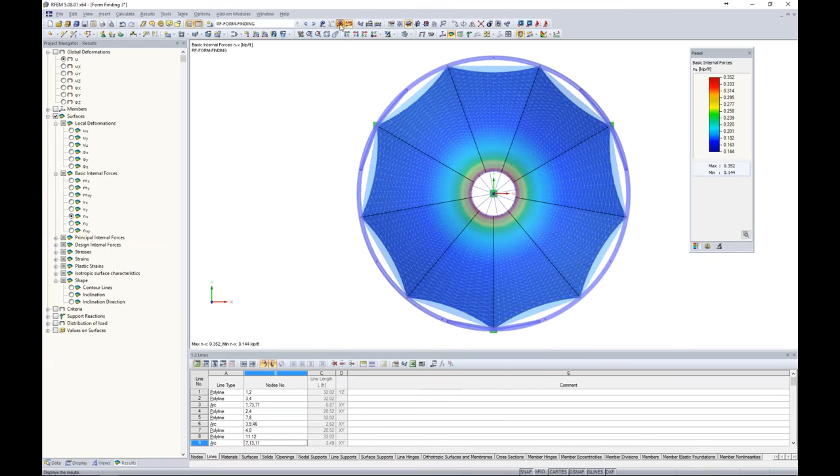Now the last thing to touch on is the RF cutting patterns. Let's turn this into an elevation view and turn off our results. As far as cutting patterns, remember we're trying to turn this 3D membrane element into a 2D pattern in order to give to the fabricator who is going to be producing this membrane.

Right now these surfaces are pretty large for our 2D cutting pattern. We could take these surfaces and cut them in half, but that would require remodeling and it's not very user-friendly. So we have a nice feature in our Project Navigator where we can right-click under lines to create a new line. This is what we saw at the beginning of the webinar, but instead we're going to choose Cut via a Section, which applies it to surfaces 1 through 9.

We move on to the next tab, and I'm just choosing a couple points here for where to make my section cut. For example, I can graphically choose up here at my origin. My second point, maybe we'll go with this surface right here. I'd like to choose the cut right down the center, so I'll choose my second point down here.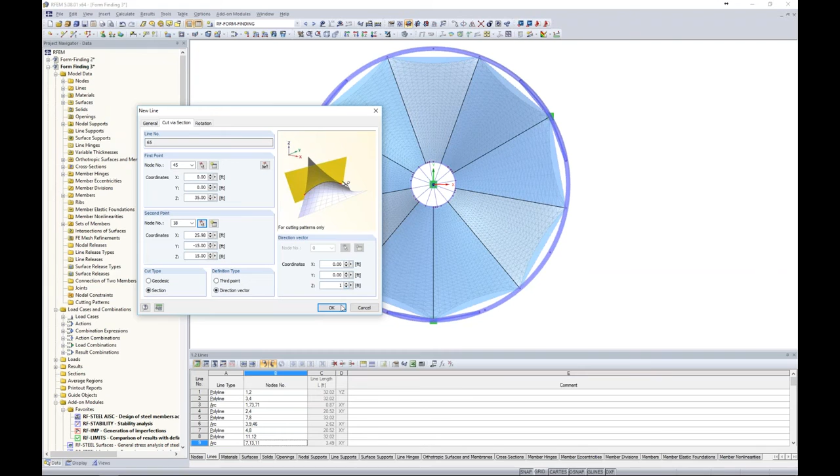The cut type will be a section, and the definition type will be according to a direction vector. This direction vector can be something completely arbitrary—for example, I can just put 1 foot here in the global Z direction. I click OK, and now you can see that line was added to this surface element. This is still a single surface; it's purely a line that was added.

What I can do is highlight this line and use my rotate copy tool, the same tool we've been using, but you can also right-click on an element to utilize it. Here I'm going to create 8 copies at 40 degrees. Make sure my settings here are turned off. I click OK, and now the program creates a copy across all of my surfaces of that simple line element. Nothing too complicated here.

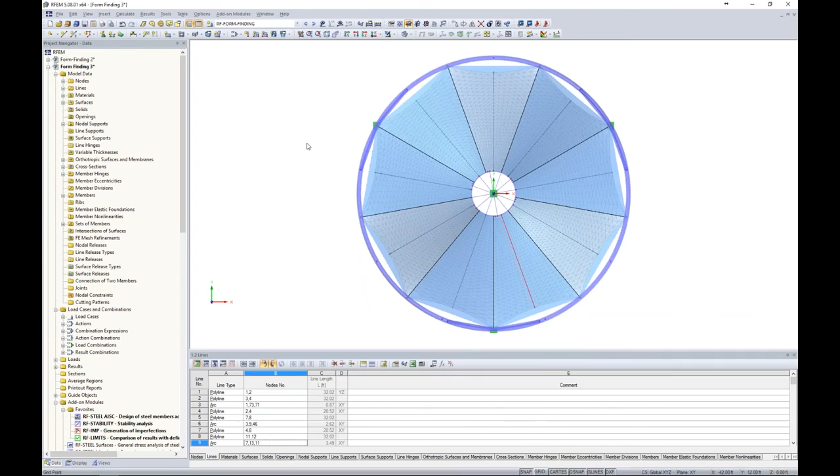Now going back to my elevation view, I want to generate my cutting patterns. For this, I simply go to Tools, Generate Cutting Patterns from Cells. This dialog box is very simple—it's asking me what surfaces to apply it to, 1 through 9, and whether I want to ignore any of these lines. Well, no, I don't—I just added these lines to create smaller cutting patterns. So I click OK, and the program generates these 2D cutting patterns.

You can see this little symbol here that I can double click. When I double click this symbol, it quickly calculates to determine the cutting pattern from a single membrane as far as the input data. This is for pattern number 4, which we can see is highlighted here.

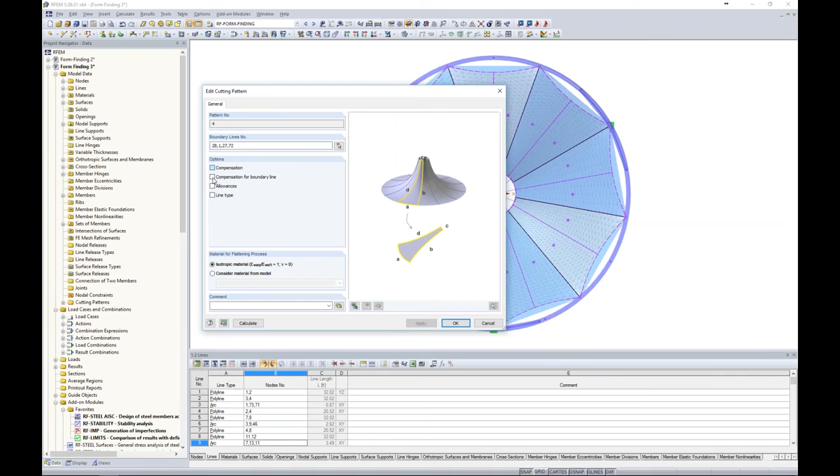We have some options such as compensation and compensation for boundary line, which as we select these, populate these tabs up at the top. Taking a look at these tabs in particular, if we look at compensation, remember that these membranes are probably going to be stretched when we apply them to our structure.

So as far as a 2D pattern, we need to take that compensation into account. We can do so whether that's standard in the warp or weft direction, or even apply it at an angle if we'd like to.

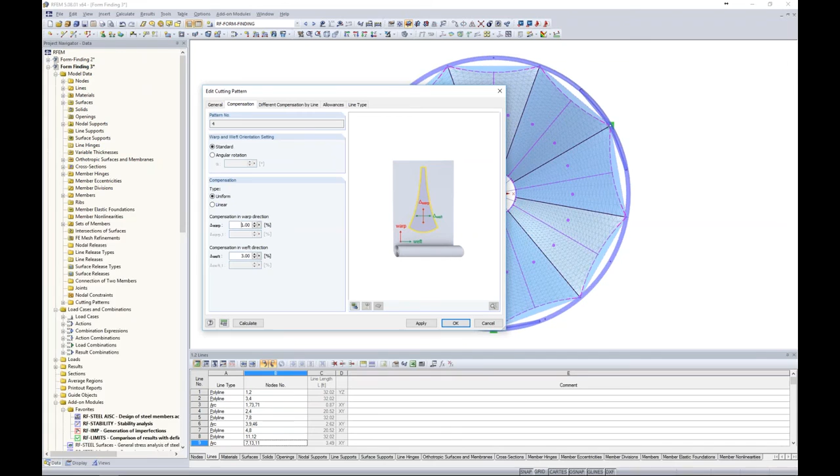As far as the compensation, we can apply a percentage here, for example, the warp direction or the longitudinal direction of 1%, and the weft direction, the transverse direction, at 3%. This is more of a uniform application to this 2D cutting pattern.

Under the next tab, different compensation by lines, this allows us to take into account different compensations for each boundary line, if we don't want to do so in the uniform manner from the last tab. Here we have allowances, which are for welding lines or for border lines.

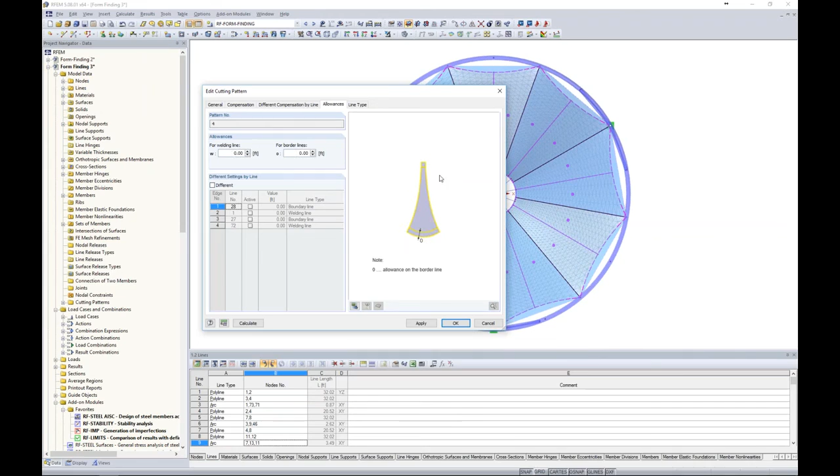For example, let's say at the top and bottom of the 2D cutting pattern, we'd like to add 8 inches of additional material. We can easily set that by setting this to 0.66 feet. Then at the bottom, if we don't want to globally set those, we can check them on for a different application for each boundary line or welding line.

For example, taking a look at line number 72, which by the way, we can always activate our numbering for our lines back in RFEM and have those on in the background as we're looking within this dialog box, if we don't know which line number 72 is.

I'd like to activate this because my adjacent membrane may be overlapping this a bit. I want to add in 4 inches to this particular welding line.

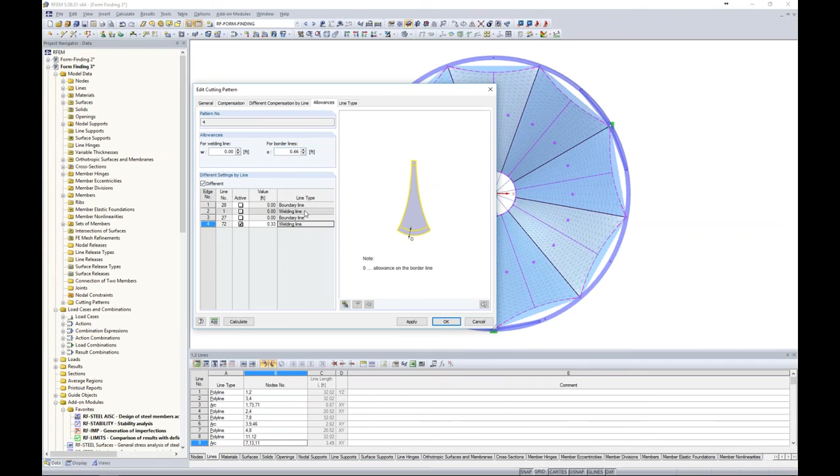You'll see that the boundary lines are automatically calculated by the program. It's pretty smart with those, but if you think, oh, that's actually not a boundary line, but I'd rather it be a welding line, well that's where the line type comes in—you can use your drop-down box here to change that.

Now that we're done with all of our input, we can click Calculate. What I've done is I have an additional model here that I can launch, because for all of these different 2D patterns I set each one to have its own border and allowance additional width. Then I ran the calculation for all of my different patterns.

So now we get a couple different tabs up here, which is our 2D cutting pattern. Once we run the calculation, we get the X and Y coordinates for our 2D pattern here. This is a table, and as I scroll through it, it is synced up to my little graphical view over here on the right.

I can always zoom in, and it's all based around my origin right here at the center, as far as what these X and Y points are. I can also turn on my global mesh here within the cutting pattern.

Right now, this is without my allowances, so without that welding and additional allowance at the top and bottom. I can also toggle that on—you can see here's my 8 inches at the bottom, here's my 4 inches at the side, and my 8 inches at the top.

Now my point coordinates here should reflect these different allowances taken into account, which if we zoom in we can see. So here's our option to export directly to Microsoft Excel.

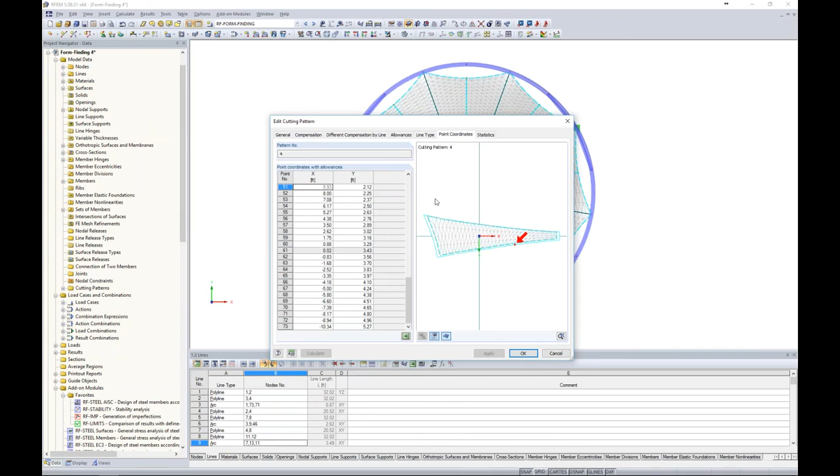Under statistics, this just gives us our area, our 2D area, our 3D area. Again, we're turning this 3D area into a 2D area based on the minimum energy theory. We also give you the height and width of the 2D cutting pattern with and without allowances. So that's basically all as far as the output for the cutting pattern.

Now, let's say we would like to generate this to our printout report, and we'll start with generating a nice picture here of our plan view. For this, I can simply print my graphic, and we'll choose the current view only to use the full page width, full page height.

We click OK. So what the program's doing now is it's cycling through to create my printout report, and it takes just a second here because it's collecting all of the input data and all of my results, especially including my cutting patterns, and creating a printout report.

So up pops this separate application, and you'll notice that we have our table of contents on the left and our actual report printout on the right. And here's that picture that I just generated.

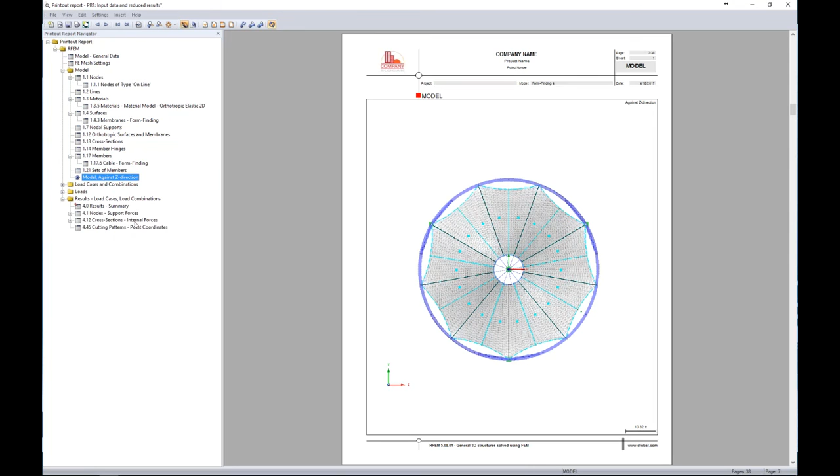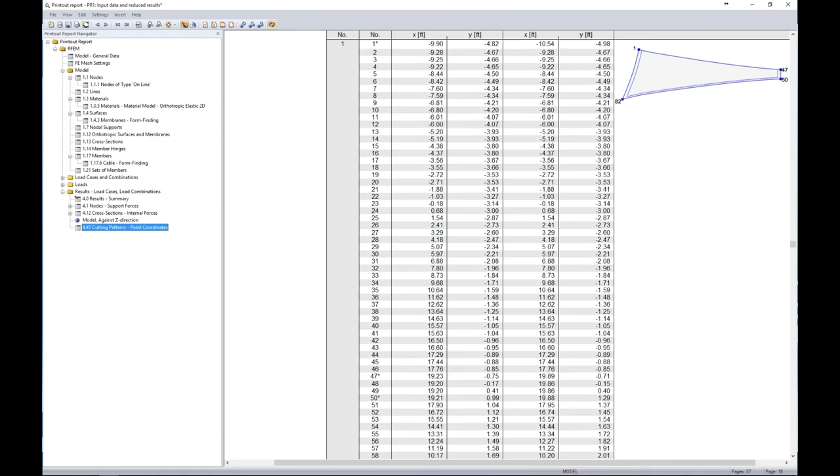So this is my plan view of my different cutting patterns. Maybe I'd like to move this to coincide with my cutting pattern point coordinates down here at the bottom. Well, I can easily do this by dragging and dropping it, and my printout report will automatically update. So I can jump down to that picture again, and if I scroll down, here is where my cutting pattern information is.

So here's my X and Y coordinates without overlaps, with overlaps. This is for pattern number 1. I have a nice little picture generated here with my node numbers, and I can scroll down to all of my different cutting patterns. So we're very powerful in how we can present this information in our printout report as well.

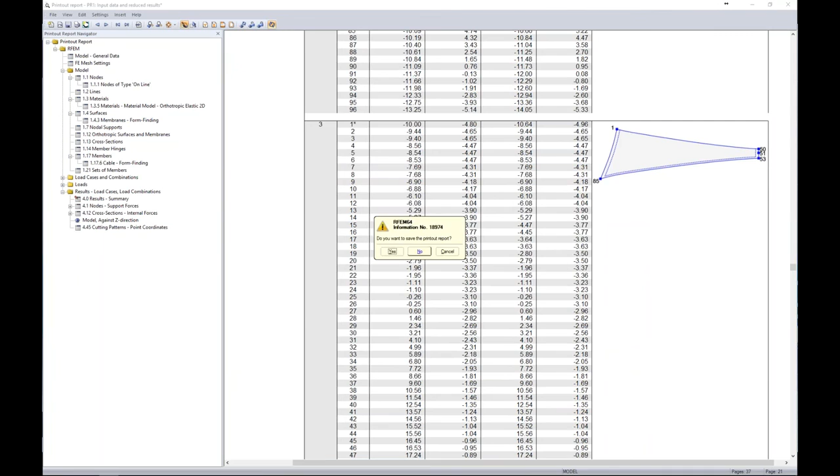So one final thing to show you is how to export this information to a DXF file. What we can do here is go to File, Export, and down at the bottom we have this option for formats for cutting patterns according to DXF. Now we will have an additional tab populated here, and this is where we can export our cutting patterns.

And then we just give it a few parameters here, such as the number of patterns per row. I can set this to 3, for example. The distances between patterns can be set at 3 feet. Here is where we can export the 3D shape of our overall structure. We can also export the cutting patterns FE mesh, or uncheck this if we don't want to see it. And lastly, we can export the 2D cutting patterns as 3D face elements.

So I click OK, I can save this DXF file, and the program will cycle through and export this, and then up will pop a little dialog box telling me that the data export is complete. Data successfully exported to file.

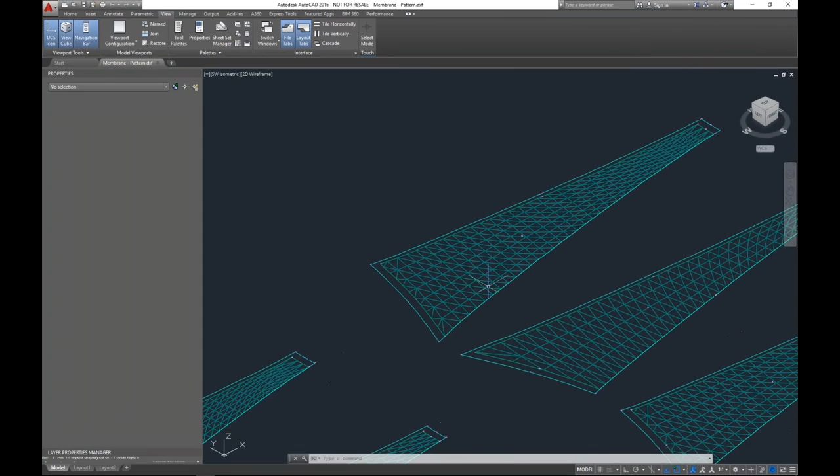So now in AutoCAD, what I can do is just open that file, which I already have saved here. This is just the DXF file that I just created. You'll notice that this is my model that I just created. Here is my 3D element, and here are my different cutting patterns. If I zoom in here, I'll see that each one is labeled according to the different cutting pattern that we had in RFEM.

We have our FE mesh that was generated in addition to our tolerances, both for the welding line as well as the top and bottom offsets here. And of course, within AutoCAD is where we can add dimensions for these cutting patterns, because everything is to scale according to the point coordinates that was created in RFEM. So again, very, very powerful in terms of creating these cutting patterns.